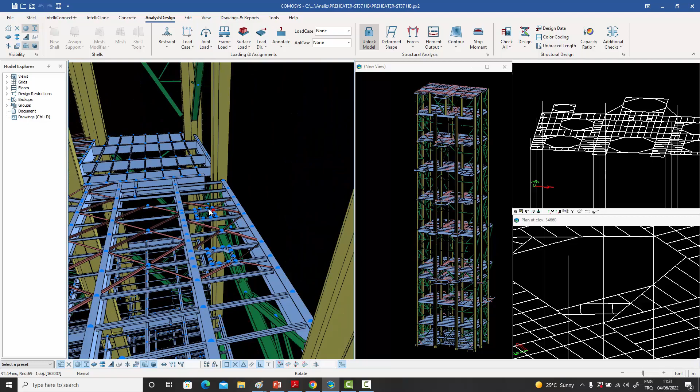Now, let's get back to today. I'll try to keep it around 1 hour, but you know me. By now, I usually end up not keeping such promises. Anyway, let's get to the point and start our webinar.

As you know, the main thrust for today are the analysis and design capabilities of Comosys. Once again, I will try and take you through the various steps involved in this process. I've created a little outline for myself, and I'll try to make it as useful as I can for you. So let's start with the basic element entry. And on the top, as you know, we have these menus, and we'll be talking about the steel and the concrete menus and the analysis and design menus today mostly.

So if we come to the steel menu, you have over here your basic frame element entry commands. And you might be thinking that in typical analysis programs, you have basically one command to enter frame elements. You basically select 2 points and you keep entering your elements. But in Comosys, you've got 1, 2, 3, 4, 5, 6, 7 commands to enter, and there are actually even more beam groups. These are all beam groups, by the way. So there's a column beam group, there's a beam group, this is a horizontal bracing group, there's a vertical bracing group, truss group, purlin groups, and there are other groups as well.

But the reason why we have these over here is because we want to automatically facilitate filtering and some other technologies which we've discussed in the other webinars like IntelliConnect and this and that. Now, coming back to the analysis part over here, to enter elements, all of these commands basically work by selecting 2 points, except for the column, which works by selecting a single point. So if I were to select this column command and click on any point, immediately a column is created. It doesn't require 2 points.

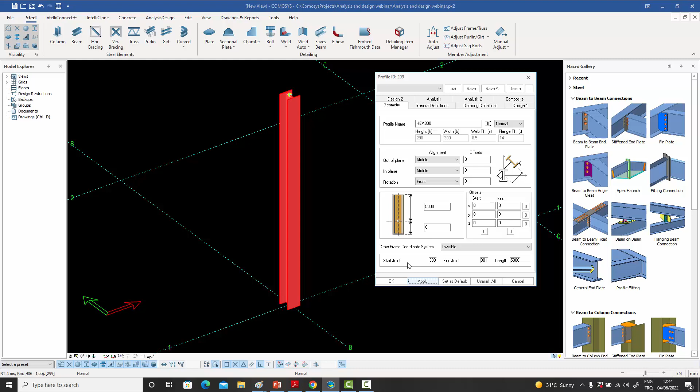So now let me quickly enter a few more columns using the same command which we just talked about, and then go to the beam command. This one takes 2 points rather than a single one like the column, and we can create some beams on the screen.

Now, as you can see on the screen, I have immediately started benefiting from using different commands for each beam group. Not only are the beams of a different color, so visually I can immediately tell which ones are the beams and which ones are the columns, but if I were to make a general selection and press enter, I can even see that beam grouping over here. So if I wanted to select only the beams, I could just double click on the beams and only the beams would then get selected.

Now, if the benefits of that automatic grouping weren't clear in the simple case which I just did, let me show the same thing to you in this large preheater model. Let me just go and select randomly like that. But what if I wanted to select only the horizontal bracings on the floors? I would just press enter, go to my profiles and group by beam group, and say I want the horizontal braces only, and immediately my horizontal braces would have gotten selected.

This could be further refined into just a particular section or beam group, but the point I'm trying to make here is that this automatic grouping by beam groups is extremely beneficial. What you can do is, for example, use the beam command to enter the entire building. You can do that. There's nothing stopping you from doing that.

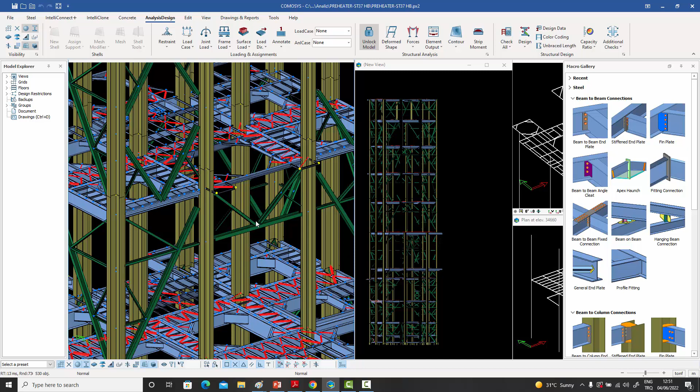But make it a habit in Comosys to always use the different commands which we have over here for the beam groups. The reason why they're grayed out right now is because the model is locked, because this is an analysis model. But the point is that you always use the relevant command: if you're entering a vertical bracing, use the vertical bracing command. If you're entering a horizontal bracing, use that, a truss, a purlin, a girt, depending on your need.

Now, coming back to our small building, let's add a few more beams. So let me just go from here to here, from here to here. As you can see, I've just snapped to the midpoints of these existing beams. What we have over here are the snap options, and if I turn them on, you can see that the midpoint has been turned on, and you've got other things like control points, intersection points, perpendicular to, perpendicular from, parallel, etc. Different options are available. But when we say midpoint, what we mean is actually the midpoint of a segment.

So this was the original beam, and when I was entering this beam, I was snapping to the midpoint of this original beam, and I went from there to there. But now if I go to the beam command again and come over here, there's another midpoint which comes up, and this is now the midpoint of this section of the beam. So midpoint is always the midpoint of the segment.

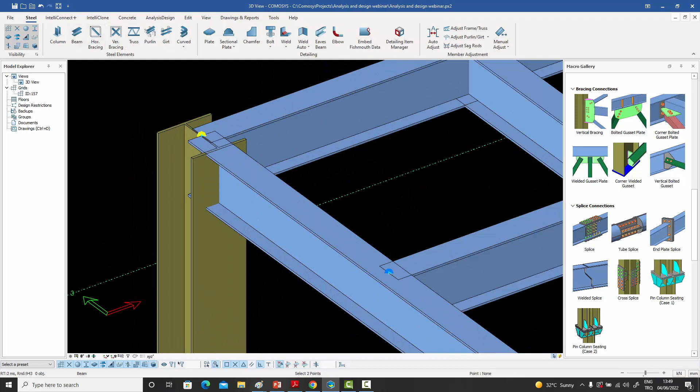Now, one thing which I want to say is that if I zoom in there, for example, and I wanted to enter a plate, you can see that I can snap to any one of these points like that. All those are snappable points. But if I were to enter a beam, it doesn't snap to those points, because it wants me to snap to the finite element endpoints. I could be working from this zoom level, and I could just go in there and say, okay, I want an element from there to there, and accidentally I could have chosen maybe this point.

So by default, Comosys will not allow you to snap to these points. We call them control points of the members, but it will force you to snap to the definition points.

Now, of course, you can override these options, and you can snap anywhere you want if you needed to. But the good thing is that it will not allow you to make mistakes like that unknowingly.

Now, since we're talking about finite elements today and analysis and design, we have to talk about nodes, or joints as we call them in Comosys. Now, in Comosys, you don't create nodes separately and then connect elements to them. As you create your elements, your nodes are being created automatically.

So if I were to zoom in there, you see this yellow dot over there, this one, which you can select. That's a finite element node. And you have the visibility and selectability of that over here. So I can turn them off, I can turn them back on.

But the moment you create any element, so let me create a column, for example, over here. Immediately, the nodes at the two ends are also created with it. So there's one over there, and if I were to turn it around, there's one over there as well. Now, the thing about these nodes is that they're of two types: what we call end nodes, and what we call intermediate nodes.

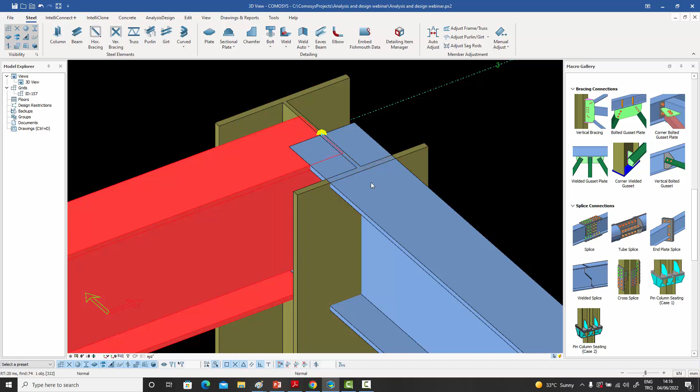If the node is an end node, it will be yellow. So this one over here, for example, was created when we created the column. But then when we entered the beams, the beams did not create extra nodes over there. So there aren't three nodes over there. Only when the first column was entered was a node created. When the beam was entered, the program noticed that the node already exists at that point, so I don't need to create a new one. So I just use the old one, and the same for this one.

So if I were to double click on this node, you will see that it says it has a number of connected frames to be 3. If I were to double click on the column I just created over there, you will see that the connectivity will be just 1. Or if I were to, for example, create a beam from there to there and zoom in again, and now double click on this one, now it's turned into 2. So the connectivity keeps changing as you keep entering new elements.

Now, I was mentioning that there are two types of nodes. One is the yellow one, which we call the end nodes. And what we mean by that is that if a node is yellow, the connectivity is 3, which means 3 elements are framing into that node. But the fact that it's yellow is telling me that it is the end of all the elements framing into it. So it's the column end over there. The beam ends at the same point, and the other beam ends or starts at the same point, basically.

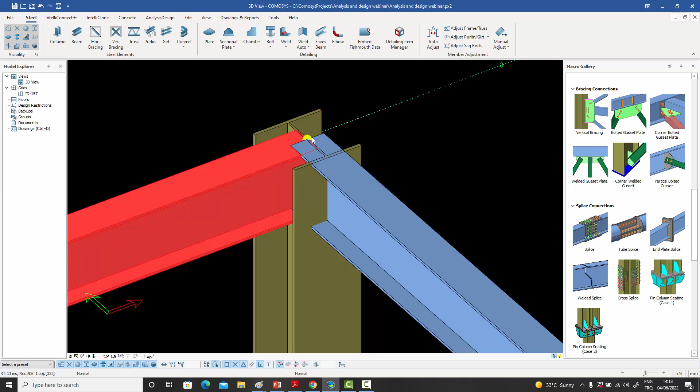But these nodes can also be blue. So, for example, the same node over here is blue, and this one has a connectivity of 2, which means that there are 2 elements: this continuous one, and this beam framing into it. Now, the fact that it is blue is telling me that this is not an end node, but it is an intermediate node. And what that means is that from the connectivity count, whatever 2 or 3 or 4, one member is continuous and the others are ending at that point. So in this case, the one member which is continuous is this beam.

So if I had another beam, for example, from here to here, now if I double clicked on that, the connectivity would be 3. But still, this one would be the one continuous one, and the other 2 would have to be end points. So if one of the elements is continuous, the node will turn blue. But if all are ending or starting at that point, then the node will be yellow.

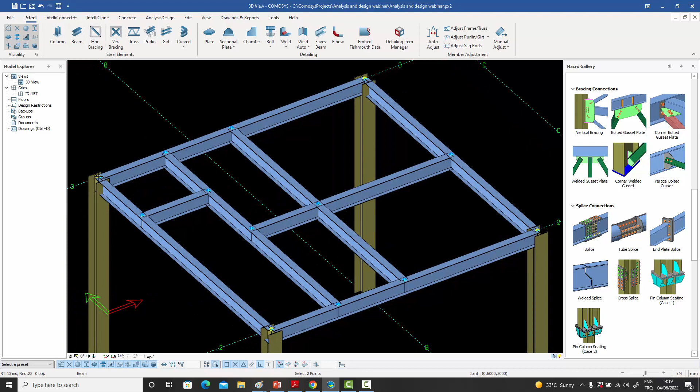Now, what you're not allowed to do is something like this. Let me find an example over here. Maybe I can do something like this. I can create a beam from here to here. Now, this one actually is going through this point over here, but there's another one going through this point as well. So you can't have 2 elements which are continuous at the same point. If you have that situation, you have to find another solution. You have to break that element at that point and re-enter it from the other side.

Now, that might seem obvious. It makes sense that you shouldn't have two continuous elements going through the same point - obviously there'll be a huge clash. But in steel detailing, you can have situations like this.

For example, if I were to go to the midpoint from there to there, and instead of putting that behind, if I entered it like that, this could be a valid real situation in which this beam is sitting on top of these beams, and in this case, one beam is going over.

So at this point, there is continuity in both elements. If I go to my finite element model, which I can do by pressing Alt D a couple of times, I can see the line mode. You can see that this line is continuous as well as this line is continuous, but no node is formed there because right now they're oblivious to the existence of each other - only one element can be continuous.

If you have a situation like this, what you need to do is slightly raise this and give it an offset, then connect it so you have these little connection elements between the two, and those connection elements will create the relevant nodes. Right now, if you do the analysis, this one and this one will not have contact at this point.

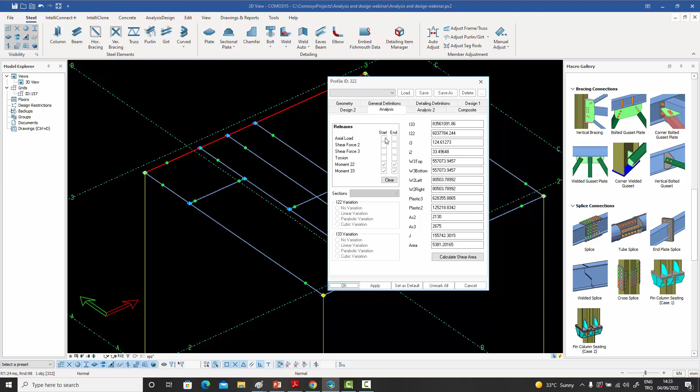There we see that the start has moment M22 and M33 releases, and the end has M22 and M33 releases. But even if it had some other release, as long as there was one release, you would see this green dot. There's a toggle especially created in Comosys, because in steel it's extremely common to have these M22 and M33 releases at the ends - so we have a toggle called Control R to remove those releases. This is very commonly used in steel.

Now, it's good practice to remember this blue and yellow color coding - the blue ones are intermediate ones and the yellow ones are end ones. Because if I make a mistake in snapping, that can remind me of my mistake or correct me when I make it. So let's say I was entering a beam from here and wanted to snap over here, but I'm going to make the mistake deliberately.

Instead of snapping to that point, if I just press enter and say dx1, which is 1 millimeter away in the x direction, and create a beam - now it seems as if everything is okay from this distance. But immediately, the presence of this yellow node will tell me something is wrong, because this one should be continuous. Had I properly connected to this one, it should have turned blue. But since I snapped about 1 millimeter away, it's actually yellow right now.

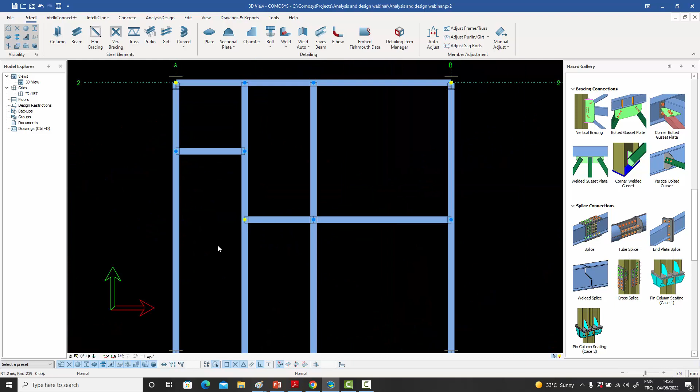If I go into the plan view and turn on my finite element mode and zoom in, I will see that I'm not actually touching that element. Now, one thing worth mentioning is that if you were entering a concrete building and using this menu, these are the commands typically used to enter the main parts of the building, with some more on the side. But only the beam and column commands will actually create a finite element model.

For example, if I were to create a slab over here right now, this will not convert into a finite element model. This does not mean that this is a shell element which will get converted during the analysis stage. Or if I were to create a wall between these two columns, this does not mean that this is a

shear wall. Both these elements are merely for detailing purposes. You can do anything. You can create flares in them. You can modify their geometries any way you want. The primary purpose is for detailing.

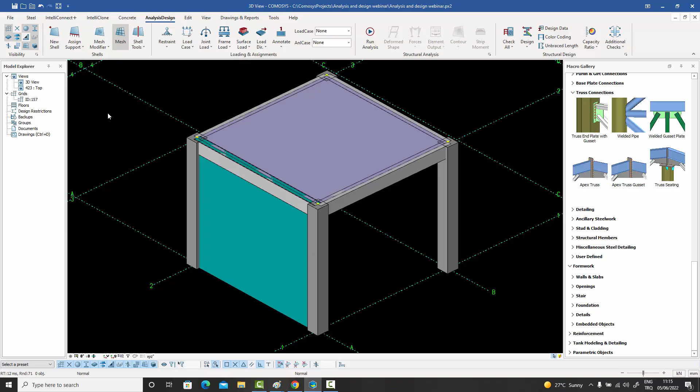If you did actually want to convert them into a finite element model, we will talk about that. There's a different command for that, which we call supershells, and they're very nice tools where you can convert any shell or any slab or any wall into a supershell. But that's a separate thing which you would need to do. At this point, what I would like to mention is that merely seeing a slab or a wall over there should not tell you that this will become part of the finite element model.

Now, a few quick words about creating load cases and load combinations in Comosys. So if you go to the analysis and design menu, you have this menu item over here, or this toolbar. And if you open that, you see there are several options in which you can create and edit

load cases and load combinations from here. You can create and edit analysis cases. You can create spectrum functions. You can edit time functions and ground motions. You can have an automatic load combo generator, which is very useful. And you can basically copy your load cases and combinations between models as well.

So if I quickly go to the create and edit load cases and load combinations, I have several ones already created over there. And if I click on any one, you see that it has a name. This is a load case. You can give it a name. You can give it a type, which is a load case.

Load cases can have types, and the types can be dead, live, wind, snow, earthquake, equipment, crane, construction loads, roof live. There are several cases which are typically used, and you can even add some customized ones if you want at the end. So every load case you will create will have a load case type.

So let's go to, for example, a wind load case over here. And so these wind load cases will have the type of wind load. Now there are certain parameters over here called state indices and sub-state indices.

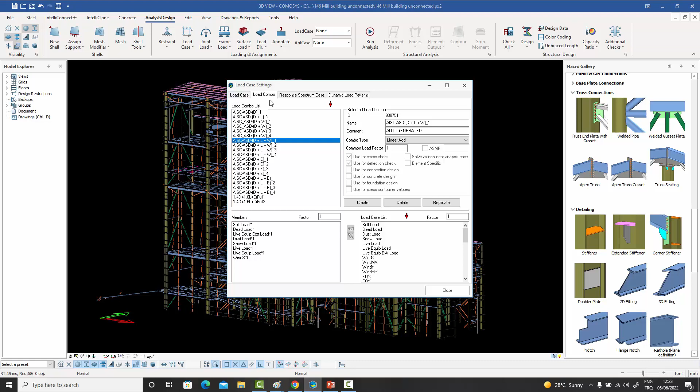So here, for instance, is a case with a crane running around these three bays, and it's got three wheels on which we have the loads. On one side we have the minimum loads, and on the other side the maximum loads. Automatically, the program will create all the load cases for each position of the crane. If you see, the state sub-indices are changing, and this has not been entered manually. This is for the load cases, by the way, and even these can be generated automatically for moving loads like cranes. There are probably about 550 positions, very small increments which the crane can take.

It will create all the load cases and all the load combinations for you. Then you can simply run through them and see how the load is moving on the screen, with the moment diagrams of the crane girder also changing according to the position of the loads. You can use this feature very conveniently for creating multiples of load cases and load combinations in Comosys.

If we keep moving, for example, we could see that the maximum loads would switch to the other side and the minimum loads to this side, creating the actions on the other side of the hall. Obviously, the building itself is getting the loads from the crane transferred to the columns and then to the foundations as well.

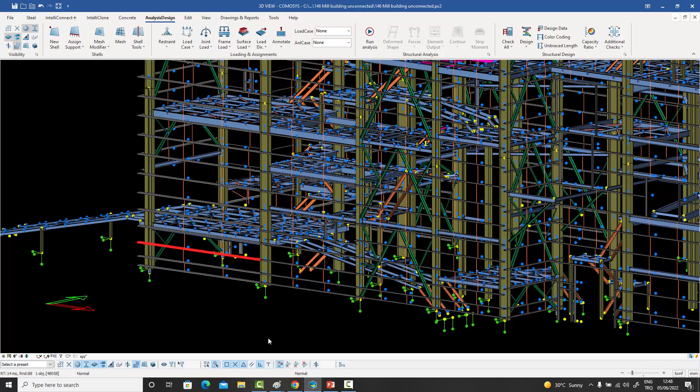Now, if you put the higher load on the girts, the entire building design will be affected, and you don't want that. So what typically engineers will do is create two copies of the model: in one copy there's the lower normal load applied on the building, and in the other copy there's the higher load, but this time they only take the design for the girts. Now in Comosys, what we have is an option called element specific load combinations.

So when you create your load combinations, you can add others. The normal load combinations have a wind factor of 1, but I've created an extra one in which the wind loads have been amplified by 40%. For this particular load combo, I'm going to open the flag called element specific. If you remember the name, it's dead plus live plus 1.4 wind, and I'm calling this one element specific.

So when I do that, this combination will not be used for the design of the building. Where will it be used? If I go and select any girt or multiple girts, double click them, and go to my Design 2 tab, I'll start seeing those element specific combos which I created. Now I can say I want to use this element specific combo for the design of this member.

So now this combo will be used only for the design of this individual girt and not for the design of the building. This will save you from having multiple copies of the same model again and again and then going through them for your design reports and so on.

Now, once we are done with defining the load cases and the load combinations, we would naturally like to proceed to the stage at which we define the loads on the building. There are many ways to define loads on buildings, and some of them you can see on the screen right now. You can assign joint loads, frame loads, and inside the frame loads you have several options for uniform loading, concentrated loading, trapezoidal loading, and temperature loading, and you can select the load cases, etc.

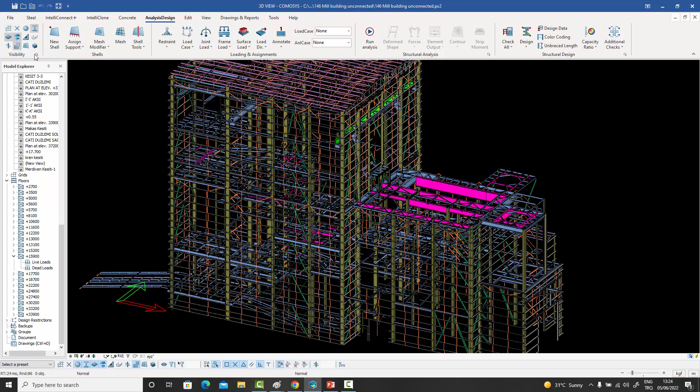As long as there's a plane available, you can use these load transfer polygons to transfer loads on that plane. So what do these load transfer polygons look like on the screen? Let me turn on their visibility from this section over here where you can turn on the visibilities of all the objects in Comosys. And over here on the right hand side, you have floor polygons and you have your visibility and your selectability options. Every object in Comosys has visibility as well as selectability.

So I turn on the visibility and the selectability of the floor polygons. And when I do that, these orange polygons appear on the screen. And these are what we call the load transfer polygons. They can be double clicked. They have their own property editor, which we will talk about.

They have properties according to which the load can be transferred in both directions or in one direction. According to your need, you can, for example, double click on that and change the load distribution to two-way rather than one-way, or you can bring it back to one-way, or you can keep it automatic depending on your needs. But this is what the load transfer polygons look like. And now I will talk about how you actually go about creating them.

So here I am on this floor. The level of this floor is 15,900. And I want to create those orange polygons you just saw on this floor. So all I do is I go to this floor menu on the left hand side, and I create a floor called 15,900. The name can be anything actually, but I'm just giving it the same name as the view so that I can recall it easily. And it appears over here in the list of the already existing floors.

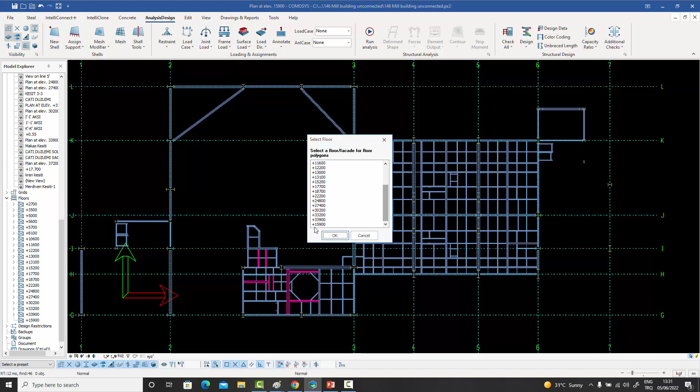And now all I need to do is I go to my frame load command. I can do it from here, or I can just right click from here as well. They both lead to the same place. But if I go from here and I say, okay, the relative level from this level will be 0. So this is at 15,900. I don't want to give it any offset, so 0 is okay. And then it asks me for which floor from the ones created on the left hand side. And if I go all the way down, I've just created this new floor, 15,900. I say okay, and the moment I do that, these orange polygons are created.

It basically goes and finds all the possible combinations where loads could be transferred in this building. So let me turn on the beams like that so you can see it more easily. It finds every possible area where you could have a load transfer, and for that possible area, depending on how the releases of the elements are, it also suggests a load transfer direction, which you can then modify later. You can convert all of them to two-way or all of them to one-way. You can change which direction you want to apply the loads.

But the whole point is that without you having to even select any points, it will create these polygons for you. And then what you can do is you can actually delete some of these polygons. And you can say, okay, I don't want any loading over here. I don't want any loading over here. This is a hole, I know that, in the floor. So you can actually go in and modify this list according to whatever your architectural requirements are.

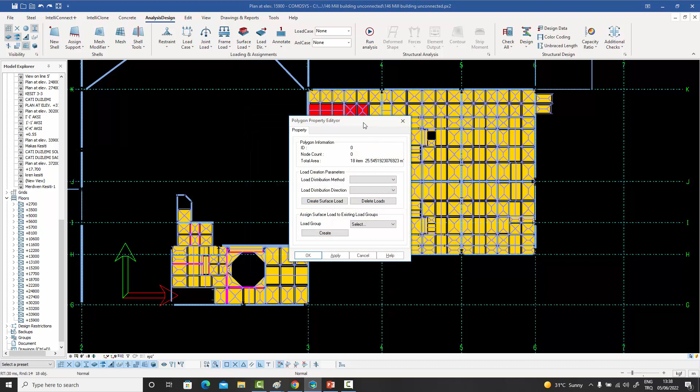Once you have removed the floor polygons which have covered areas which are supposed to be holes in the floor, for instance, you can go ahead and modify the loading transfer directions. So, for example, if I wanted to change all these into two-way distributions, I could just select the floors by the on-the-fly filtering, and then go in there and say I want these to be two-way as well, and those would be converted into two-way. You can select the whole floor and do that. Now, once you're happy with that as well, the time comes to actually apply the loads through these floor polygons.

Now, to do that, all you need to do is just go to the floor polygon, which we have created at the 15,900 level, right click and say, I want to create a surface load using these polygons. And you select that option, and this little dialog box appears. You can select a load case. So let's select the live load case, for example.

And the direction can be global X, Y, Z directions, or you can say perpendicular to polygon. So like I said, you can do wind loads on roofs or any inclined surface. So in this case, I'm going to leave it at global Z, and I'm going to give it a name. I'm going to say live load, and then I'm going to give it a value according to these units. So let's give it a value of -5 kilonewtons per square meter for these floor polygons, and say OK.

And when it says, do you want to create the surface loads? Yes. And the moment I do that, if I open this up, this little live load has been created on that floor. Now, if I were to then rotate this around and look at it like that, and turn on my live loads from over here, the reason why they didn't show up is because the visibility of the loads is off. So if I turn on the visibility as well, you will see that all the live loads have been created from those floor polygons.

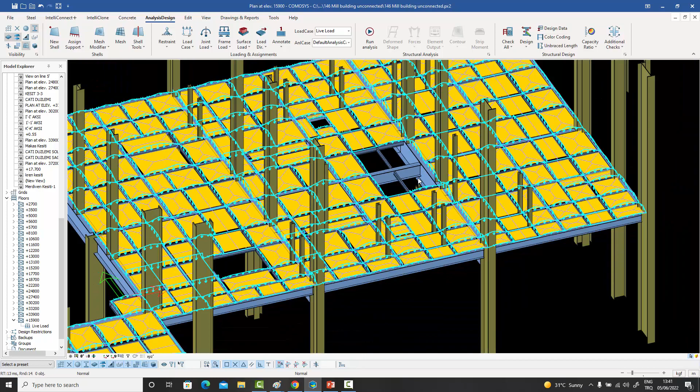So let's say somebody tells me that even this part doesn't have a flooring on top of it. When I do that, you see that the loads are being modified as we delete those polygons. So this is a very easy way to create your floor loads.

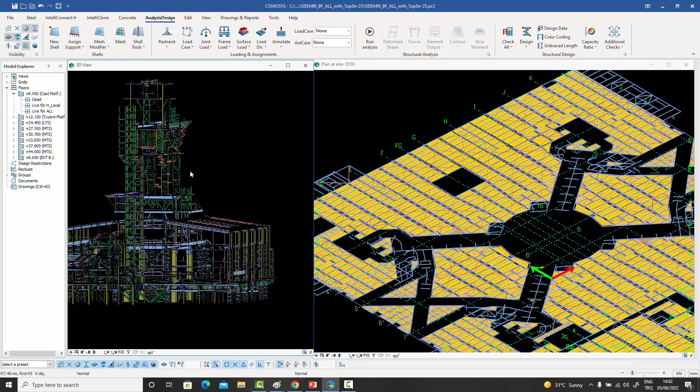Now, if you were doing an earthquake analysis, say based on the equivalent static load method, you would find the equivalent static loads at each floor level and apply them as horizontal loads on, say, the columns directly at certain node points, and that will give you the overall impact of the equivalent static loads on the foundations and on the braces, etc. But we know that in reality, the earthquake loads actually stem from the accelerations of the mass inside the floors. So it's not correct to just assign them to the columns directly.

Just like it's incorrect to assign wind loads directly to the column, they're actually coming through the girts or the purlins. Similarly, the earthquake loads are also coming through the mass which is available inside the floor, and through the live load participation, which is once again present inside the floor. So another thing which you can do with these polygons is you can ask it to create another surface load, but this time you can choose a load case, of course.

But instead of choosing the global Z direction, for example, let me choose the global X direction and call it the earthquake X load. Let's say my equivalent static load on this level is 10 tons, and the area of this whole thing is, let's say, 100 square meters. So that's like 0.1 tons per square meter. So I can actually go in there and say something like 0.1 kilonewtons per meter square, for example. This is my earthquake load in the X direction using these polygons.

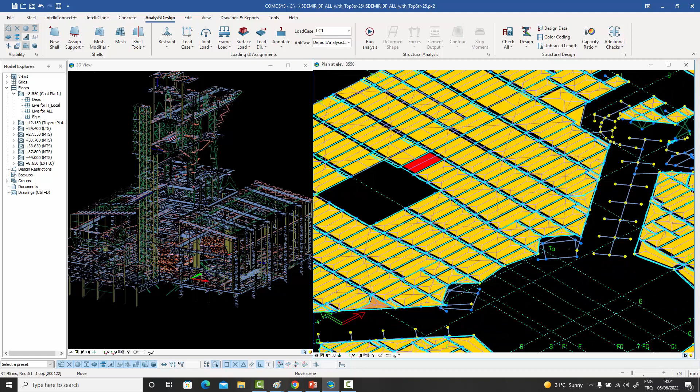If I do that, it asks me, do you want to create the load? If you see on the screen, it has actually created horizontal loads using these polygons once again, wherever they are perpendicular to the beams. So let me turn the beams on. Whenever they're perpendicular to the beams, they have been created as lateral loads. And for this beam, for example, over here, it's being applied as an axial load directly inside the beam.

So it'll end up as the same 10 tons which we wanted to give to the columns, and the columns will receive the total of 10 tons, and that will be transferred to the vertical braces and from there to the foundations. But the actual small moments which in real life do occur on these beams as M22 moments, for example, and all the loads in these horizontal bracings, etc., will actually be much more realistic if you apply the loads in this fashion.

Now, as I had said, these floor polygons are not really restricted to floors. The name is floor polygons, but they can be used on any plane in space. The plane can be an inclined plane, it can have whatever orientation. So over here, I have created a roof plane. This plane, as you can see on the left-hand side, is an inclined plane. And on this roof plane, I've created a view. And using this view, I'm going to just ask the program to create the polygons for me.

And I'm going to give it a level of 0 because the relative distance from that view is 0. I'm just going to say OK. And immediately you see these floor polygons are now created on the roof plane. And I have filtered out the sag rods and the horizontal bracings from this view because I don't want the polygons to be broken at those levels or at the roof bracing levels. And because I've done that, now these floor polygons conveniently are located between the purlins, and they will distribute the load left and right of the purlin.

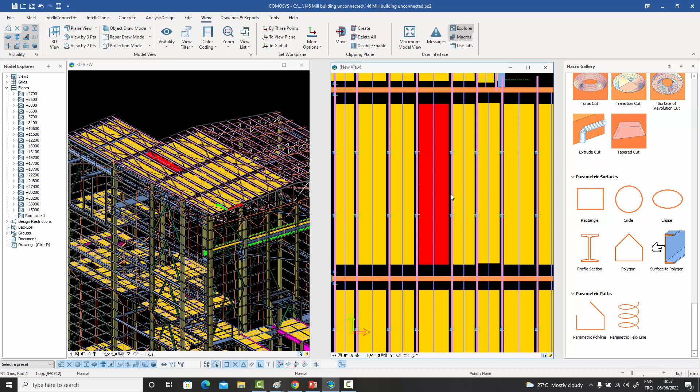And now that I have the polygons, I can once again conveniently take them, right click and say create surface loads. I can say, for example, I want to create a snow load. I'll say perpendicular to polygon this time because the polygons are inclined, and I want to create a load which is, let's say, the roof wind load. I shouldn't say snow load, snow load is vertical, but let's just put it in snow load for the moment. Let's give it a name, roof snow, assuming that it's actually in the direction of the wind. I'm going to give it a value of 1 kilonewton per meter squared. And the important thing is it's perpendicular to the polygons, and that's what I wanted to show.

So when I say OK and it's created, the snow load option is open. And as you can see, the roof loads have been created perpendicular to the polygons, over there. And you can also notice the last purlin got lesser load because the tributary area was less from the left, and the other ones got the same load. So these floor polygons are extremely convenient to create all sorts of load. You can use them to create wind loads, snow loads, live loads, earthquake loads in the X and Y directions. Basically anything which resides on a plane, you can use these polygons to create.

Now, without wasting too much of your time, I want to move on. So I'll just show you that, obviously, you can assign joint loads. You can select any joint and give it a joint load in the form of forces or moments. You can assign joint displacements as well. We'll talk about them later. You can assign frame loads. So if you were to select any particular frame and go into the frame load command, you can assign uniform loads or concentrated loads or trapezoidal loads or temperature loads, and for each one, you will have different parameters to enter in the dialog box.

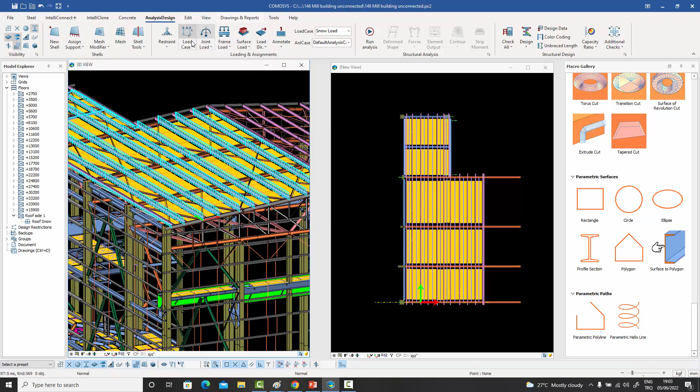And you also have these other ones which we talked about. I won't be talking about the area loads which are applicable on shells, or area loads or line loads or point loads on shells. We'll get to them when we talk about shells. But all kinds of manual loading is possible, and you just need to know that at the moment. So I just want to move on to the next topic.

Now let's move on to joints and what we can do with them. So we had discussed these yellow and blue joints before. The yellow ones were end nodes and the blue ones were intermediate nodes. What you can do with them is you can select any one of them, double click on it, and it will give you this option of adding a restraint to that particular joint. And you can obviously have U1, U2, U3, R1, R2, R3. Those are the restraints you can have.

If you press this one, then the whole thing gets fixed. Press this one, it's a hinge. This can be a roller. You can modify them manually as well. But what else can you do with joints? You can select any joint and you go over here and you can assign a joint mass to that joint.

And the joint mass, you can give it a name. You can give it translational masses in the 1, 2, and 3 directions. And you can give it a mass moment of inertia about the node in the local axis 1, 2, 3. And you can define the units over here. That's one thing you can do with joints.

Another thing you can do is you can assign joint springs. So if you want to model the soil and you don't want to make it fixed, but you want to model it like a spring, then you can assign a joint spring. Similarly, you can assign joint restraint, which is what we just talked about. And you can also assign multi-joint constraints.

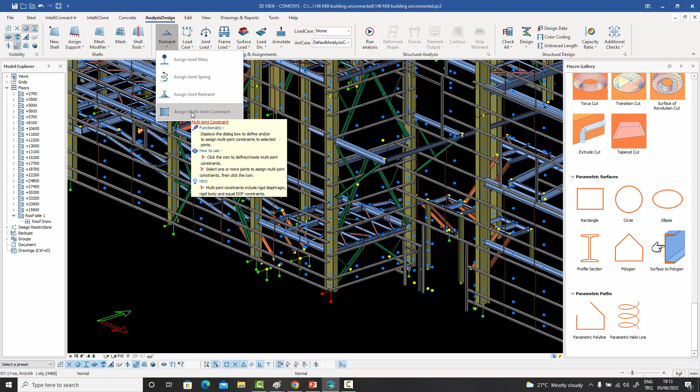Now, what we mean by that is, let's go to the site, for example, if I were to select an entire floor and select the joints on that floor, and if I went into assign multi-joint constraints, I have the option of making it a rigid diaphragm, or giving all the selected joints an equal constraint, or giving the selected joints a rigid body constraint.

In the case of a diaphragm, you can give that diaphragm a name. You can define the constraining axis, which is usually Z for the horizontal floors, but you can even make it along any plane. By selecting the auto option, whatever plane is defined by those joints, it will be taken to be perpendicular to that plane. With the equal constraint, you have the option of defining which particular degrees of freedom will be equated as far as those joints are concerned.

You can give it a name once again. You can save them away. And for the rigid body one, you only need to give a name. There's nothing you need to define because the selected joints will behave like a rigid body. There's a difference obviously between a rigid body constraint and a rigid diaphragm. The rigid diaphragm doesn't behave like a rigid body. It behaves like a rigid body only inside the plane, not outside the plane.

Now, since we talked about assigning masses to joints, let me just remind you that you don't always have to do that. When we go back to the load cases, you can specify any particular loads in a load case to be converted to mass during the analysis stage if you're doing a dynamic analysis. And you can say that any load which I enter under this load case, convert it to mass with a mass conversion ratio of whatever this number will be. Codes will usually specify these numbers, and 0.3 is a very typical number for live loads.

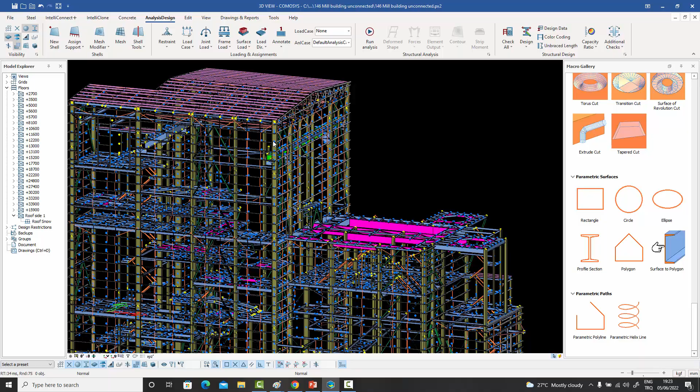Now we've talked about entering the basic frames and how to give the joints restraints and constraints, and then how to create load cases and load combinations and all that. And it seems that we are now ready to run the model. But there's one thing we haven't talked about, and we need to talk about that first, and that is shells.

Now we know that no analysis model is really complete without shells. Maybe not that much in steel, but especially with concrete structures, we have to model a lot of times our shear walls and our slabs, etc., using shells. And so I need to tell you about the various features we have in Comosys regarding shells. Now, the first thing which I need to tell you is that in Comosys, you don't enter shells directly, but what you do enter is something we call supershells.

So I'm going to enter a supershell. And what you do is you simply go around the entire floor, for example. So let's let this be the entire floor. And the supershell appears in front of you. Now, if you double click on that, you open the dialog box of the supershell. And here you can change how it will be drawn. So I like the contoured solid.

There's the thickness of the supershell, 200 millimeters at the moment. There is a uniform density, because the supershell is going to be meshed for the analysis. So right now it's about 1 meter. And there's a default material which we have, and we can change that to any other material. For example, I can convert it into, say, a C35 concrete, 200 millimeter thickness, and say apply. Okay, and now we have entered the properties of this supershell.

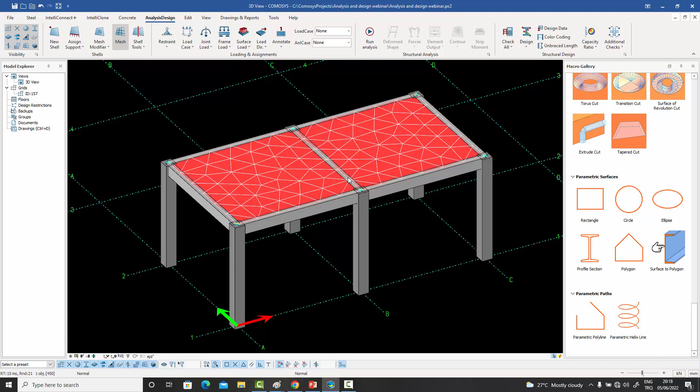One thing I want to say at this point is that these beams you see over here, because the supershell will be meshed like this at these points, for the finite stiffness matrix assembly, this beam will also be broken into little parts in the background. You won't notice that, but in the background, while it's assembling the stiffness matrix, in order to have a continuity in the displacements, these beams, wherever they're touching the supershells, they will be broken down into their own subparts.

Now, these supershells have some really amazing features which really make your life easy when it comes to the analysis of shells. And one of them is its ability to sniff out or locate whenever there's a frame element touching it. So I already talked about how these will be meshed because the supershell is in contact with it. But this is not only at the edges.

If I were to, for example, enter a beam like that and say DX 1000 using the static entry method, and at the other edge, if I were to say DX minus 1000 and basically enter the inclined beam like that, and now if I ask the program to give me a preview of the mesh, you will see that now the mesh has changed and it's going along this line of the beam. And not only will this beam be broken down into subparts, but the mesh created by the supershell is also in perfect union, in perfect harmony with that particular frame element.

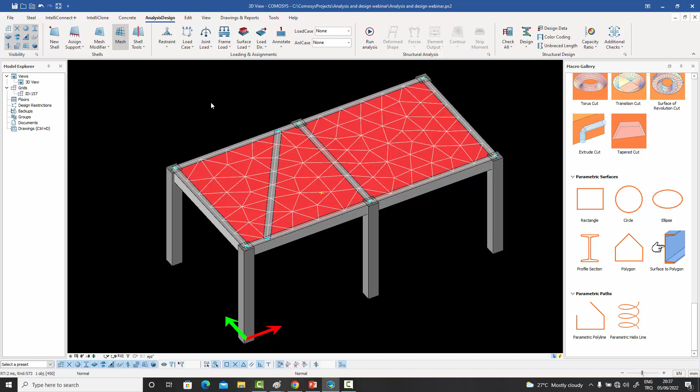But that's not all. Let's say we were not happy with this density of 1000 which we see on the screen, and we wanted a higher density. We could just make the density higher, call it 300. When we do that and mesh again, we can see the density has changed, and once again it fits the beam along that line as well.

But this is not what we want to do. What we want is to keep that density of 1000, so let's keep it back to the normal number. But we know that for some reason there's a stress concentration in this area, and we want a higher density, but only around this point and not on the entire slab.

So what we do is go to our mesh modifiers and say we want an internal point at this point. That's the first thing we do. Next we want an internal mesh density at that point, and we put that element there as well. Then we select them and press enter. For the density point, we can say we want a density of 250 at that point, and this number should be about 3 times that number, so let's call it 750. This is the radius around which it will spread out.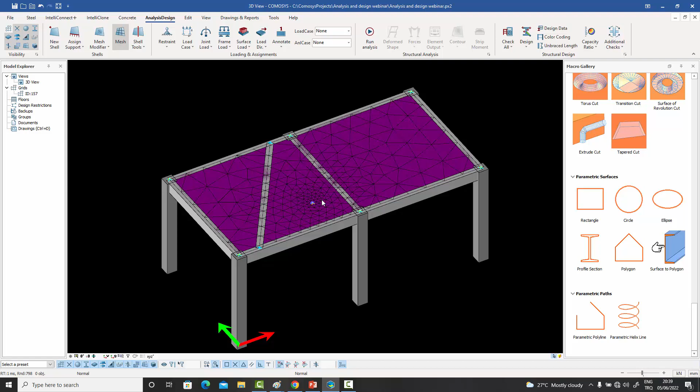Once I do that and press preview mesh again, you will see that the density has been reduced around that point only, and it slowly grows back into the normal number of 1000 which we had elsewhere in the supershell.

But it's not just internal points which we can use to modify the density of the broader region. We can also have internal lines. So I could go to the mesh modifiers and say I want a mesh internal line between this point and this point. Then I can also change the density along that line, so I once again select the same 2 points.

Once I do that, I can select those objects, go to my density line object, double click on that, and give it a density of, say, 350 millimeters, and give this one a higher number because this is a line now, not a point.

Once we do that and preview the mesh again, we see that not only do we have this increasing mesh size around the point which meets up with the 1000 general density, but we also have the same phenomenon going on around this line, and it's meeting up with the broader density of the slab as it goes out into the outer regions.

But even that is not all. Slabs and walls can have holes in them, right? What if this supershell had a hole in it? How would the meshing algorithm behave according to that?

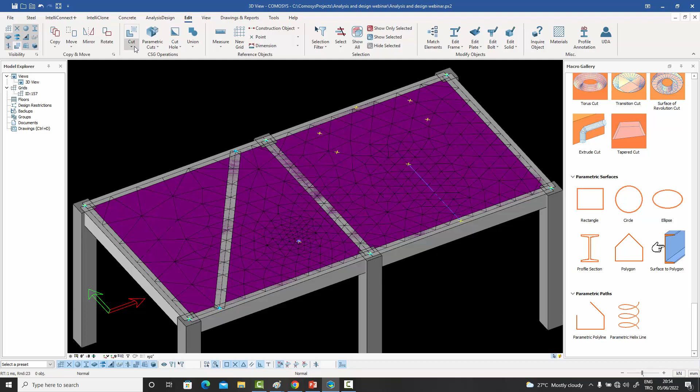So you can go to your cut commands. What you can do is go to your polygon cut, select this supershell, and say I want to cut this, make a rectangular opening in there. You just select the points, and the rectangular opening is created. The moment that happens, your mesh basically regenerates.

If we were to select that cut and move it around, right click and say move linear, give it any number in the Y direction, and say move, you can see the mesh is adapting as the cut is moving, even as it's going through that density line. It's very convenient. Let me move the cut, and you can see even the density is still being applied along that line, and the cut is being made.

Basically all our requirements, which were a hole in this area, increasing line density along this line, but a general density of 1000, all those requirements are being satisfied.

Now we know that the supershells are intelligent. We've seen that, and they can sniff out these elements which are lying in the plane of the supershell and mesh according to their presence. But what if these frame elements were not in the plane but were actually outside the plane, in the direction perpendicular to the plane?

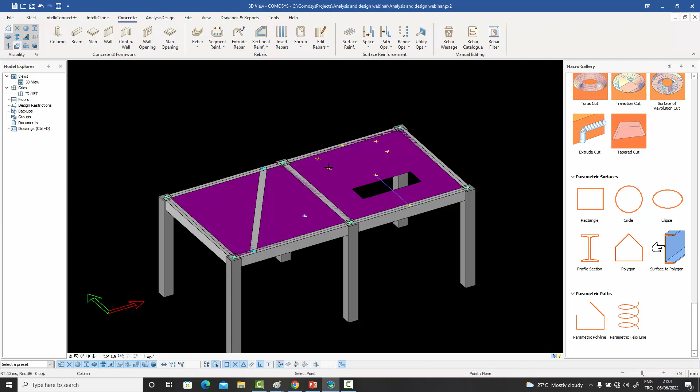So let's say we had a column sitting at this point on that slab and another one sitting at this point. These are not inside that plane, so let's make a beam on top of it as well. Let's make matters even worse, and go to the analysis tab and create a new supershell, like a shear wall, or like a wall. Let's create it like that, double click on it, change the color for convenience, make the settings, turn it into a concrete element, and give it a different density of 350.

Now we have a different, even more complicated situation in which we've got some elements coming up vertical or perpendicular to this existing supershell, and one of them is a supershell itself, and they're also frame elements like you see on the screen. The density of this particular supershell is 350, while the overall density of this one is 1000. So what's going to happen at these points of contact?

Let's go and ask the program to do the preview mesh for us. And when we do that, we see that this one has been meshed with 350. And as it touches this one, because the density is higher, it's being forced to adapt to that one.

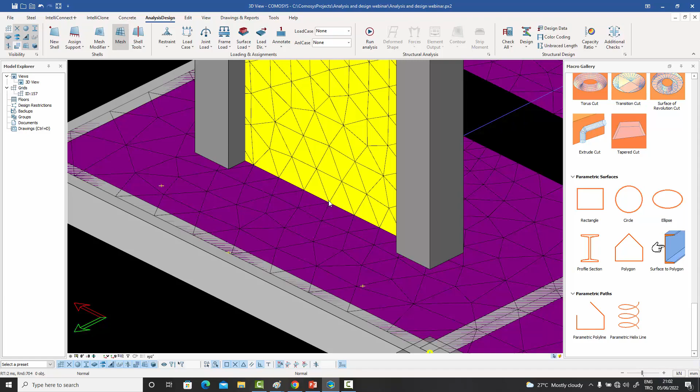And on the back side as well, you see a perfect harmony between the meshes. And if we were to convert this into line mode, you will see that the columns are landing at a point which is an exact node point for the supershells. So what we have is exactly what we would have done by hand, and this would have taken us hours to do.

You can probably already feel the kind of advantages this supershell meshing is going to give you. Those who are thinking about steel might already be thinking how they can use these features to design or analyze steel connections, to a certain extent. And especially for concrete structures, you've already seen the kind of power it can give.

If we wanted to make a shear wall over here, we could just enter a supershell again. Once again, as you know, we don't enter shells, we enter supershells in Comosys, and Comosys does the rest. So we can enter a supershell, change the settings if you want to, whatever.

And then if you wanted this bottom part to be restrained, we could assign the line support, for example, and say from here to here there is a restraint. What that will tell Comosys is, if you double click on that, just like the joint restraints, we can have UX, UY, UZ, RX, RY, RZ, constrained or unconstrained.

You can remove those. But what it will tell Comosys is that when you're doing the analysis, this wall is going to be meshed, obviously. And so some of those joints will come along this line. So whatever joint ends up on this line, that needs to be fixed like this, according to these fixities.

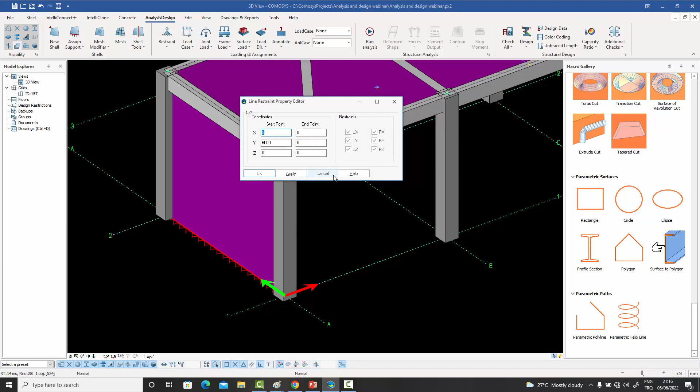Similarly, just like the line support, you could have point supports as well. So instead of having the entire line fixed, you could have just a point over here fixed, and then whatever node would come to that point would be fixed by Comosys.

Now, sometimes slabs don't have a uniform thickness across the floor. So you could have one thickness, and then a slightly bigger thickness in a particular region, for example. So what you do in Comosys is you go to your shell tools and you have a supershell region modifiers. Once you select that, you can select the supershell, right click, and then select the points where you want a different thickness property, or some other stiffness property can also be modified.

And once you do that, if I were to just hide this, for example, what it has done is it has created a hole in the original shell, but it has added another shell exactly at that point. And this particular shell now you can modify with a different thickness if you wish.

If you just double click on that, you can change the thickness from there. You can assign it some soil springs. So maybe only this particular part can have some different soil spring, or some load case related. You can take existing loads from the parent supershell. So a lot of things can be done with these region modifiers, which are very useful.

Now, obviously, you can assign loads to these supershells, and if you go to the surface load menu, you can assign the supershell a surface load, which needs to be a uniform load, basically, along the entire supershell. You can also assign a line load, as you can see over here. You can assign a point load, as you see over here.

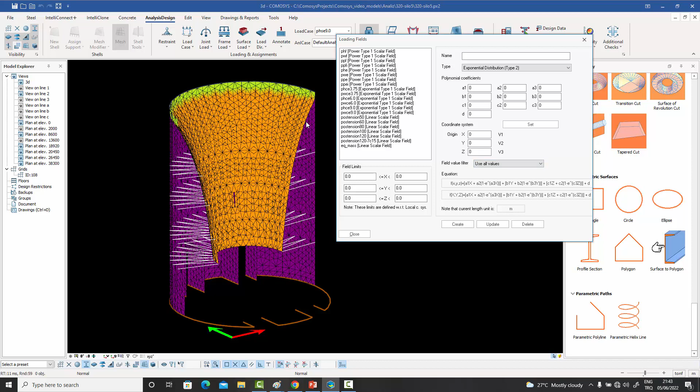So you have 6 different types of fields which you can have. And then you can also tell the program that although this field can have both negative and positive values, I want to only use the positive, where the values are positive or 0, or only where the values are negative and 0. And since it's a vector field, wherever it runs into the coordinates, it runs into the actual supershell.

So this is the supershell at the back, and this orange is the vector field. Wherever it hits, whatever the coordinates of the supershell will be, this vector field will have a value because it's a vector field defined at all xyz coordinates. So whatever the xyz coordinates of your supershell are, the vector field will assign a force at that point according to its own value at that point.

This is extremely powerful, so it can be used in silos for the internal loading of materials, which are usually not linear functions. There are different kinds of functions used. And because you have the polynomial option as well, and the exponential and power function options, you can do a lot with this kind of loading. This is really unique to Comosys, and it will help you solve a lot of your loading problems.

Here I've created this little 5-story concrete building. It's got 5 floors, and I've put one supershell on each floor, basically encompassing the entire floor. Then I've got these shear walls, one on the left and one on the right. The thickness of the shear wall is about 20 centimeters, and the thickness of the slabs is also 20 centimeters, I think that's the unit, yes.

I have loaded it to give a uniform vertical load on each of the supershells in the live load case, about 200 kilograms per meter square or something like that. Then I've given it some wind X loads and some wind Y loads. I haven't gone into detail, I've just put some loads at the top level in the X direction and some loads in the Y direction at the top level, and those are in my wind X and wind Y load cases.

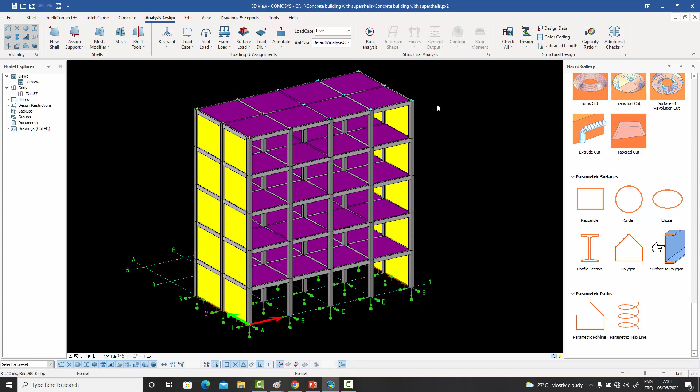Now what I will do is run this analysis in front of you. It will create the mesh at runtime. Like we discussed, we could have had holes, line loads, all sorts of things would have been possible, but I just want to show you the results of how we check the results of the supershells. So let's run the analysis in front of you.

It says the project is going to be saved. Do you want to continue? I say yes. And now it's meshing the entire structure, and it's a fine mesh. So it takes a few seconds, and then it basically finishes the job.

So let's check the deformed shape first. That's what an engineer should do first, just in case there's anything wrong with the model. That'll be the first place which makes that apparent. So if you press that button, we come to this different page, where we have these options to play around with the deformed shape, and we can rotate the view over here like that as well.

And what we see is the live load case. Like I said, we had entered the live load case in which there were vertical loads, wind X and wind Y. So right now we're seeing the live load case, and we can turn it around to see from various angles. If we press this animate button over here and say start the animation, we can see how it's going to deform. And while it's animating, we can also turn it around.

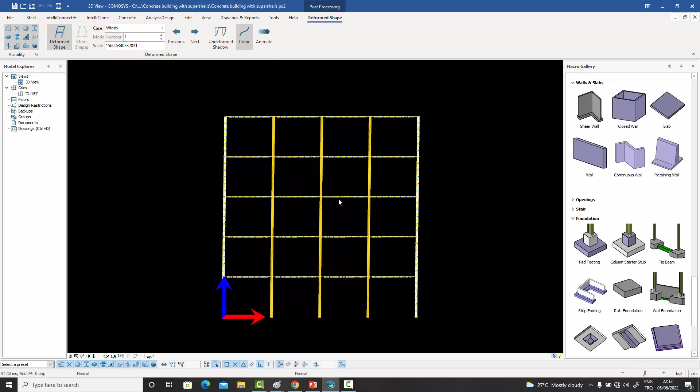One thing I can do is I can change the load case to wind X. And when I do that, I can turn it to the side as well, and I can see how it is deforming. Once again, I can turn it to wind Y, and this time it's the other direction. And like this, I can easily inspect what's happening with the deformed shape.

Now let's get back to the structure itself. And over here, you have this contouring option. And if I press this button from here, this submenu appears. And if I go in there, I can set the settings for how the contours will be plotted. So let me do that.

So over here, I have the option of plotting either forces and moments on the supershells or stresses on the supershells, or we also have soil pressures and surface displacements, surface loads, and even areas of steel. So I'm going to start off with the forces and moments. If you choose the forces and moments, then you have F11, F22, F12. These, as you know, are the shell internal forces. F max, F min, M11, M22. Let's keep it at M11 because we're going to look at the slabs right now.

And over here we can have a customized range for the output as far as the M11 values are concerned. We can choose to create contour lines or draw the mesh, etc. Let's just leave it like that. And after doing the settings, we just press this button over there, and it's going to create the contours of the results of M11.

And on the right hand side, you see this legend, which tells you what are the minimum ranges of the stresses in whatever units you have over here, and what are the maximum you see on the screen. And this is a very easy way to inspect the results.

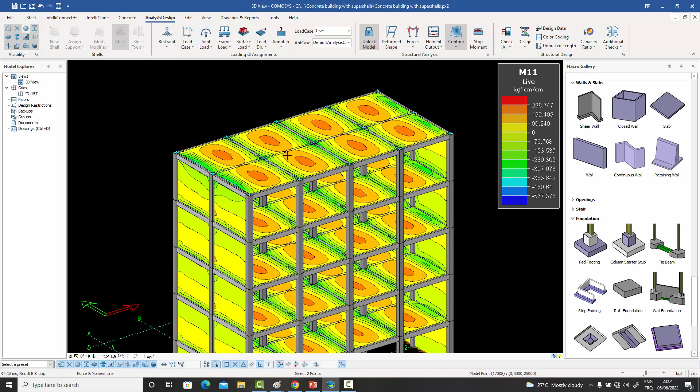Now, coming back to these results for the vertical loads, these M11 results, what we can also do is we can create what we call strip moment lines. So I just select this button, and I select 2 points. I can select any 2 points as long as they make a line. And then I can select that line, press enter, double click on that, and I can say show the diagram. And when I do that, immediately the moment diagram along that line is created.

So if I were to, for example, select this and say show only this one, I can see the moment diagram across that line, and I can place my steel accordingly if reading from the supershells is a bit more difficult. And similarly, I can create this line in the other direction as well.

So I can have this line from this direction, from this point to say this point. And now, once again, I can select that line, press enter, double click on the force moment, tell it to show the diagram. And once that happens, I can now see the diagram in the other direction as well.

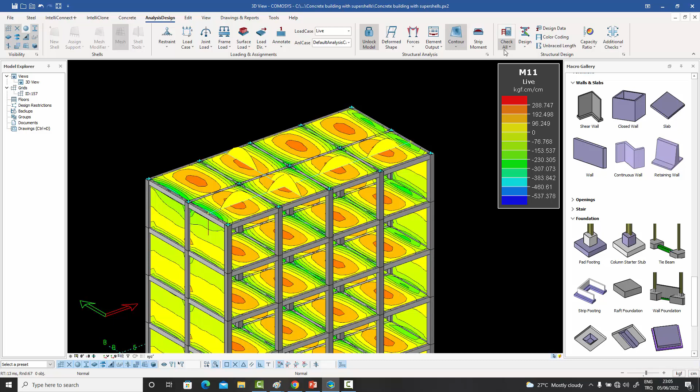So these strip moment lines can be, like I said, they're lines, they can be in any direction. They're particularly useful if you're doing something round, for example, a circular slab, and you want to place the reinforcement in the radial direction, for instance. But the supershells have been created in whatever coordinate systems you needed for creating that circular slab. But you want to see the moments along the radial line. So you just basically use this strip moment to create along the radial direction, and you will get to see something like this to see what the moments are along that line.

Now, as I had mentioned earlier as well, if you go to the settings over here, you have these various options of checking stresses or forces or soil pressures, and you also have this option of checking the area of steel. And if you select that, then you have these options of checking the top surface area in the 1-1 direction, the area of steel required on the bottom surface. Similarly, along the 2-2 direction for the top surface and the bottom surface.

So let's just check for the top surface what our requirements are. So how much area of steel we need for the top surface. And when we do that and we press this button, we see that for the top surface, we basically don't require, so there's 0 over here. This is centimeters squared of area per 100 centimeters. So we basically don't require anything in the middle. We only require the top surface area in this region. And we can check how many centimeters squared are required using the legend over there.

Similarly, if we were to go back in and check for the bottom surface, we will get the opposite result, because then we don't need any bars in this area for the bottom surface, but we basically need it in the middle. And over here also, if we know how much minimum reinforcement we're going to provide anyways for the slab, and we know what that number is, we can put that number over here.

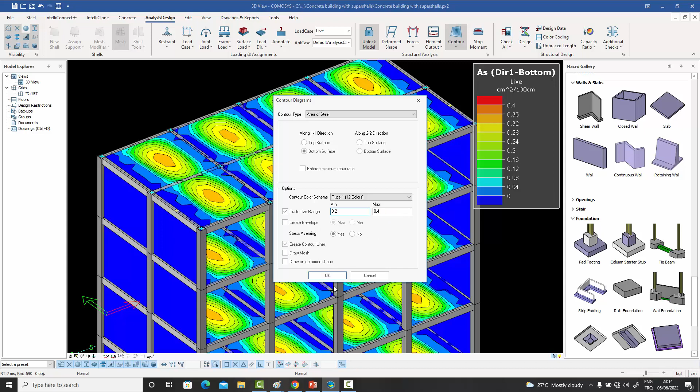And so what it will do is it'll only tell you about the areas where even that minimum is not enough. So if I change the minimum over here in the customized range section, what it will tell us is that your minimum is basically okay everywhere as far as the bottom reinforcement is concerned, but these areas require reinforcement. This is the range from the minimum to the maximum. The blue areas basically won't require any because you already have the minimum over there. So it's a nice way of checking wherever you want to put some extra reinforcement.

And if it is not concrete slabs which you're designing and you're interested in steel plates and their stresses, then in that case you will obviously go to the stresses section and probably be more interested in the von Mises stresses, and you can easily then tell which areas of your structure are being pushed to the limits, and then you can increase the thicknesses of the plates in those areas.

Now there's one very handy little feature which I just want to talk about for a few seconds and then move on. If you go to your Supershell tools menu, you have the option of splitting supershells and converting plates to supershells. But there's also this option of converting any surface into a supershell. And this is pretty handy, and at times it can really help you quicken your modeling time. So you basically just select this, and then you can select any surface on the screen.

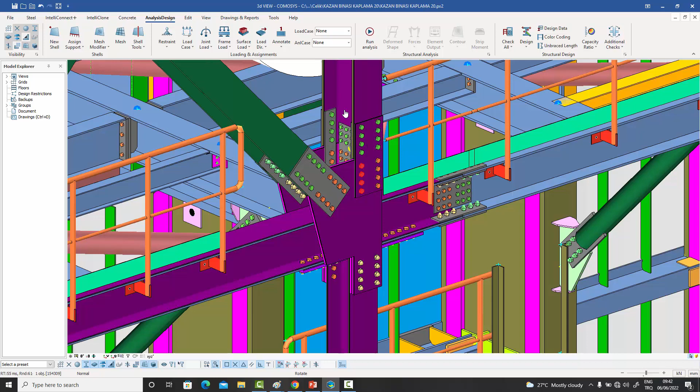So let me just select this I-beam flange and this I-beam web and the back of the flange again, and then this web and this flange and this bottom flange, and for the column as well, this one and this one, and this plate and the plate at the back. I'm just doing random selection right now, and maybe I want to select this plate over here as well, and I right click and I interrupt. And if I go into my visibility settings and I just open my supershells right now, you can see that supershells have been created for that area, and I could have continued clicking.

And then obviously you have to now go in and do the rest of the modeling. But this will, if you wanted to, for example, somehow model this connection, or it could have been some other instance where you could have used the surfaces to create your supershells. Now each of this is a supershell.

You can go in, you can change the density, you can change the thickness, you can use all the features which we talked about for internal lines and internal points, and you can have your points of the bolts, for example. You can have little elements connecting them and stuff like that. But this is just something I wanted to mention, because it is very useful in quickly creating supershell models from something existing which you have on the screen.

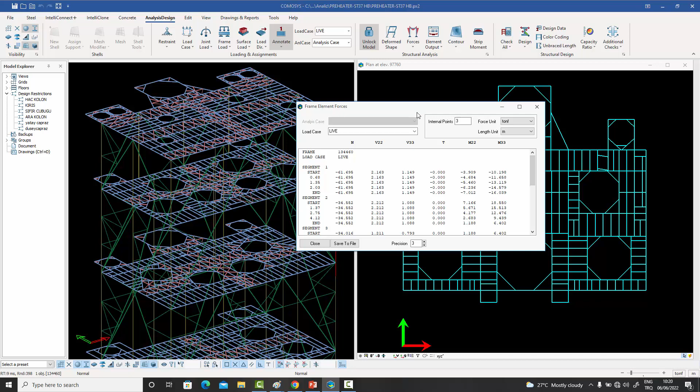Now let's talk about viewing the analysis results on the screen. So we can do that in both tabular as well as graphical form. So if I were to select a column, for example, and go over here and say I want to see the element analysis output tables, we can select any load case which we want from here, and for that column it will tell us about all, because this column is a huge column. It's going from this story all the way 2 stories up, and these stories are pretty tall.

So it'll give it from the start, segment 1, segment 2, segment 3, all the way down till the end of the section. And you can even ask it to increase the number of points for each segment, and you will see all your 6 major results: your axial force, your shears in the 2 directions, your torsional moments, your moments M22 and M33, etc. If you want, while the table is open, you can switch to another element. If you want, you can select multiple elements, and the entire tables for all those elements will be presented to you in tabular form.

What you can also do is to select any element, and then instead of the tabular format, you can do it as an internal force diagram as well. So once again, I've selected the same column and I've chosen the live load case, and I can move my mouse cursor over the column, and I can see the actual values in whatever units I want. And I can see values for the axial force, the torsional moment, the bending moments, etc., and even the deflections, depending on what load case I choose.

If I wanted to see the results for the entire building in one go and not element by element, I could just go to this command over here and say turn on my M33 moments for the entire building. And then I can zoom in and see what their relative values are. If I select a particular element, then the values of that particular element will be shown. If I just don't select anything, then everything will be shown, but that obviously becomes a clutter depending on how complicated your building is. But what you can do is you can go and select any particular element, and then you will see the values of whatever moment diagram or shear force diagram you are printing on the screen.

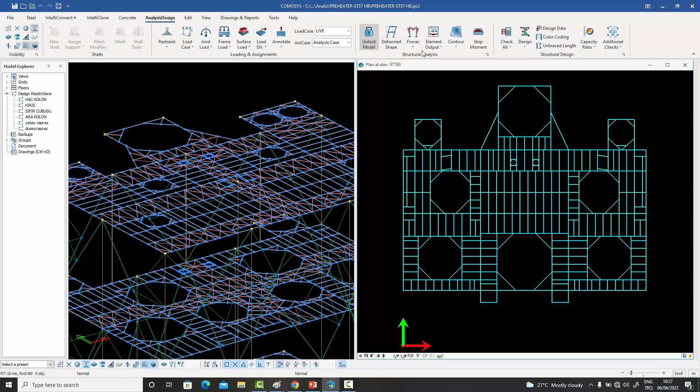Now, let's say we are in this view, which is a plan view, and I wanted to look at the M33 moments, for example, for the elements which are visible in this view. If I press that, I'm not going to see much because the M33 moments are out of this plane. So what I have the option to do over here is to say project to the current view.

Now, if I do that, then my M33 moments are projected to this view, even though they're actually in the other direction. But since I'm working in the plan view, this provides a handy tool for me to see which particular beams are being stressed the most and where the moments are the maximum and stuff like that. So this ability to project to the current view is very useful when you're working in plan or sectional views.

Now I want to move on to the design capabilities of Comosys, and I want to start off with the basic design tab, which is in the dialog box of all frame elements. If you double click on any element, we see this dialog box, and I want to quickly go over the basic parameters which are available over here so that basic understanding is achieved. So the first thing we see over here is check for lateral buckling. And this tells the program whether we want this particular element to be checked for lateral buckling.

We can turn it on or off, depending on whether we want that or not. Now, this is an interesting flag over here, which means provides buckling support. So what this tells the program is whether this chosen element actually becomes a supporting member for other elements. So for example, if I were to choose this particular beam and double click it, and I say that this one does not provide buckling support, then the buckling lengths will be calculated as if this element does not exist. And these ones exist, but this one does not for the beam, for example.

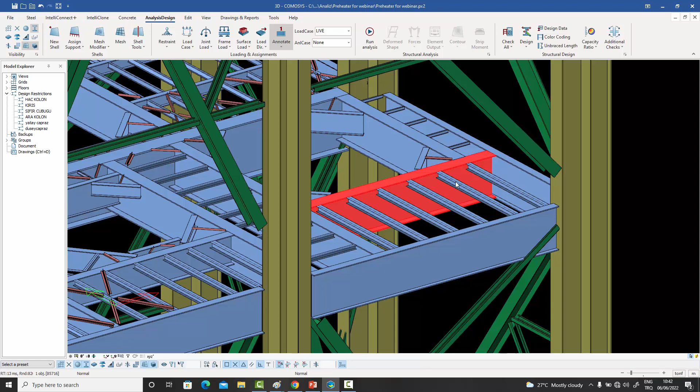Now, this obviously depends on, maybe this is not a good example, but if we had, for example, girts over here or roof purlins, you might or might not want to include them as providers of buckling support for the column. In industrial buildings, it's very common for the girts to be removed temporarily for maintenance purposes and this and that. So although they do exist, you might not want to consider them for your buckling support.

Now, continuing with the tab, there's this thing called forced. What that tells the program is that you don't want this element to be designed by Comosys. You want to force this particular section. You don't want any optimization. Maybe there's an architectural requirement, maybe there's some other requirement, and you don't want to allow the automatic algorithms which work for design to act on this element.

You can tell whether it's a rolled section or not, and that obviously can change the design. This is important. So for example, in columns, the columns might be braced in this direction, the main direction, or in the web direction, or they might not. And depending on whether the structure is braced or not, you will turn on these checks. Here you have something called the design restriction, which I'll talk about in a second. More importantly, over here you have your design sections, which I'll talk about when I'm explaining the design procedure.

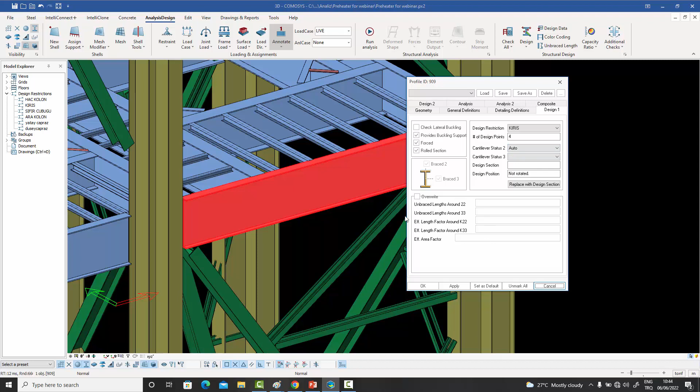This is the number of design points for each segment. So every element will be divided into segments. So even this beam, for example, it's a physical beam going from here to here, but it has lots of things connecting into it. So it's composed of many sections. And so we have section 1 over here, 2, 3, 4, 5. So what that number is telling the program is that each section will be further divided into 4 points, 4 design stations to do your design checks. There's something about a cantilever deflection check, which I'll talk about, and there's the ability to override your buckling lengths as well. So let me just close that and we can continue with explaining the design parameters.

So now let's start with the buckling length calculations of elements, as that is really a very problematic area in most programs. If you actually input your structure according to the detailing requirements, then the programs really mess up when they have to calculate the buckling lengths. So what I've done is over here, I've divided this physical beam into 3 parts because I want splices over here in the detailed model. But as far as the main direction, the entire length of the beam should be used for buckling in the strong direction, and in the weak direction, obviously these ones will restrain the beam from buckling. So I want them to be considered as well.

So if you go to the analysis and design menu, we have something called the unbraced length. And this can be checked for both the 2 direction and the 3 direction, 2 being this axis and 3 being that axis. So if I were to press the unbraced length button and then hover over this beam, I'm expecting the entire length of the beam to be shown as unbraced. And for this side, I want these elements to restrain it. So let me press this button and go over this beam. And as you can see, despite the fact that I've broken it, it's still showing the entire length of the beam as my unbraced length in the stronger direction.

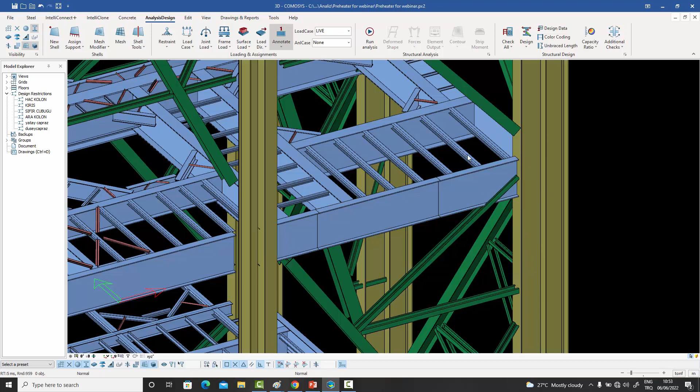And this larger green portion has basically skipped over the element which was coming perpendicular to it, which would normally have supported it, but since we've turned it off, it's no longer supported. Now, another thing I can do is, instead of doing this, I can leave this on. I can say it provides buckling support, but I go in and give it an axial release.

Now, in this case, if this element has an axial release, whether on the start or at the end, it doesn't really matter. It's not going to provide buckling support in the weak direction. So although I have that feature on in the design tab, that it does provide buckling support, my analysis constraints are different. And now, if I go to my unbraced length command and go over this, for the stronger direction, we have the whole thing. And for the weak direction, once again, we see that the element has been omitted.

Now let's talk about a column, for example. So let's select this column, and this column is going across 2 stories, but it's also extending into this third story a bit. But at the point where it is ending, there is nothing to restrain it. It's just continuing to connect with the column over here.

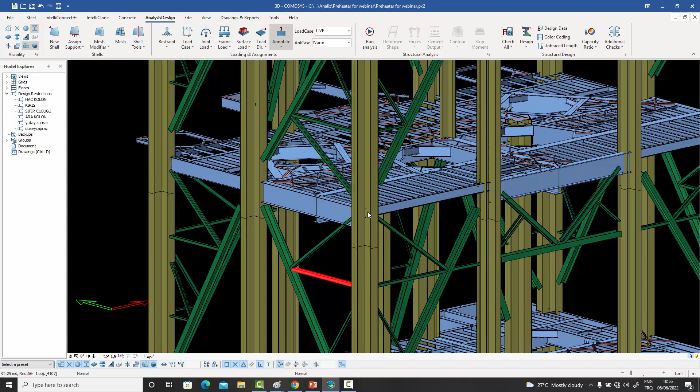So if the program was to do, if there were any design sections over here in this region, the buckling length which needs to be taken for those is not just this little stub which is coming out, but it should be the entire segment all the way to this point until you get to these lateral supports for the other column. So if I were doing any design checks over here, my segment length should be this whole length all the way to these restraining elements.

Now if I go to my unbraced length command and select this column, you can see that in the bottom area which I just showed, the entire area has been painted red. That will be the segment length taken, although the column actually stops short of that. So this feature is extremely powerful, and what it allows you to do is to focus on your detailing as well. You can check your splice locations.

You can model your columns and your beams according to the actual splices where you want them, and you can rest assured that you won't need to override the K factors and the buckling lengths, because they're really time consuming. And every time you run the analysis and the section changes, if you have to go back and modify those factors, then that's really a big problem.

In Comosys, the buckling lengths and the unbraced lengths are calculated very accurately, even if the element is composed of several parts, even if it falls into a segment where the element after that needs to be considered, as you just saw on the screen. And this is a really time-saving feature. And the same intelligence is available to you for the deflection checks as well. So it's not just the buckling checks.

For example, if Comosys checks for the deflection of this element, it will know that even though I'm checking along the stations for this little stub, it needs to take the entire length into consideration. So let's say the deflection limits are L over 500. Then which L do we use when designing this element?

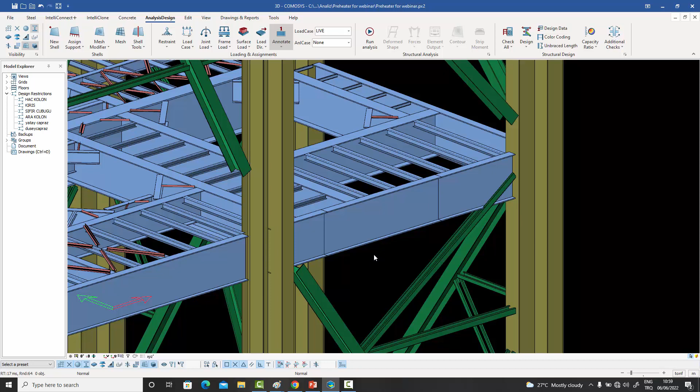Do we take this L, or this and this put together, or all the way? The same intelligence we just saw for buckling lengths is also available for the deflection check. You do have the option of going to the design tab and overriding the automatically found unbraced lengths around the 2 direction for each segment.

If you want to override, you could enter several numbers. For example, for the first segment the unbraced length is 3 meters, for the second segment it's 4.5 meters, and for the third segment and onwards it's 5.5 meters. You can override in case you want something different, but in most cases you will not need to override, and that's a huge advantage.

You can do the same for the effective length factors K22 and K33. But if your releases have been entered correctly and your buckling lengths are correct, then your K22 and K33 factors will also be calculated correctly. Still, you have the option of overriding the result.

Now I want to talk about a concept I feel is extremely important for the design process: design restrictions. In most programs, when you want something designed, you typically say use sections from a particular family, for example IPE, and the program goes through all members of that family to find one solution in the design loop.

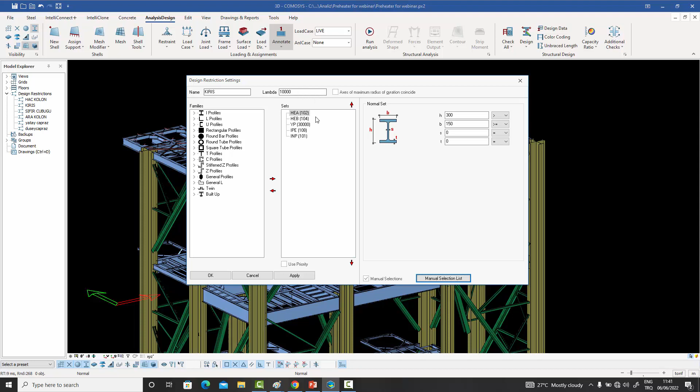For vertical bracing, you can create a design restriction—let's create another one and call it VB. You can say that when designing the vertical bracing, try single angles first, then try twin profiles as well. So you go to the twin section and say try back-to-back angles after single angles, and if that doesn't work try cross angles, and if that doesn't work try back-to-back channels.

And if that doesn't work, try face-to-face channels. And if that doesn't work, I want you to come back and do an HEA section for the vertical bracing.

So you can have a complicated design restriction set up like this, and for each one you can have limitations on the HBST values. For cross angles, you can say put a distance of 12 millimeters between them. For back-to-back ones, you can have the same distance depending on your detailing requirements, etc. So you can have very complicated scenarios, and you can also have this feature called use priority.

What that means is it will first go through the angles, then try the back-to-back angles, then the cross angles, and so on. But if you remove this flag, what it will do is put all these families - the angles, back-to-back angles, cross angles, and I profiles - into one bag, and sort them according to their weights, linear weights, weight per unit length.

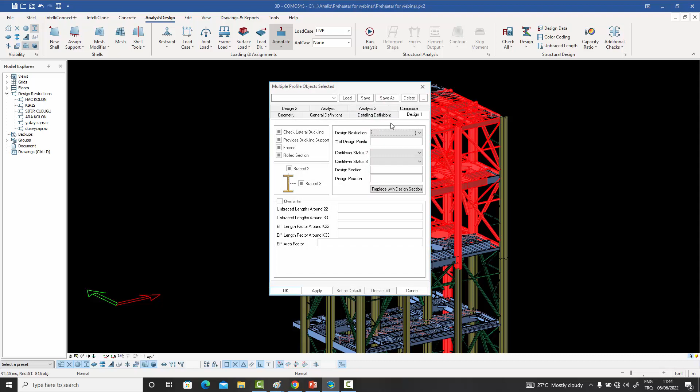And you can do that with multiple selection as well. For example, you can select all the beams over there, or let me just turn on the on-the-fly filtering - go to profiles, filter according to beam groups, and only select the beams. Then you can say I want these beams to be designed according to this design restriction.

This is a very powerful feature which will really clean up or make your design process very efficient. Now, once we are done with the analysis, we can proceed with the design.

We have these options of either checking elements or designing elements - these are two different options. You can check a particular element, which would be check selected, or check all, or check a particular subset, or design the selected elements, or design the entire structure.

Let me explain the difference between checking and designing. What checking will do is take the existing section - so if this is the existing profile with a certain size - check just means use the existing section and do all the design checks at all the stations.

Right now, if I were to select this element, the analysis has been done, but if I say show me the design data, it's empty - the element has no design information, it's just been analyzed. But if I select it and say check selected,

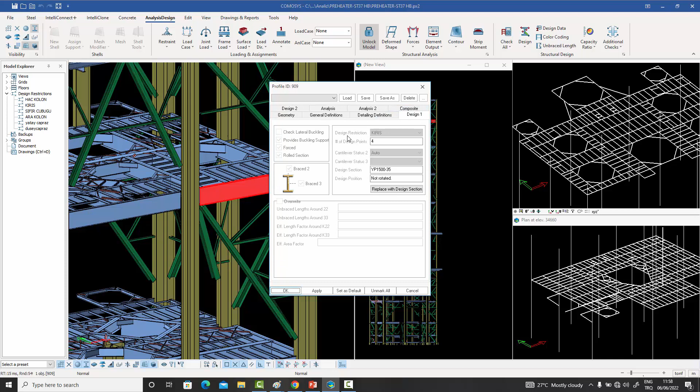How will it find this section? It will use the design restrictions which we had provided. For example, this particular beam might have some design restrictions. Let's go to the design tab. So it has a design restriction, and it has a name over there. This particular design restriction is over here. We can go in there and this says check for HEA, check for HEB, YP, IPE, and this and that.

So instead of saying just check all, if you check the selected one and say design the selected one, it will go through this design restriction and find the appropriate section for you. Let me just do that, let me double click on that. Right now we just did a check, but if we were to select this and say actually design the selected one, it will suggest a section for you. It will tell you that if you use this section, it will give you the optimum result, and then you can modify the existing section according to that, and there are very quick ways of doing that and replacing it for the whole building, etc.

We will obviously talk about those as well in a minute. Now, instead of checking a particular element, let's just go to this check option over here and say check all. This will tell the program to check all the members of the entire building. So let's just press that. Very quickly, it goes through the design of all the elements, all the stations, and all the load combos, and in a few seconds, it's completed.

Once the check has been performed, we can turn on the color coding from here. Immediately on the screen, you can see that the elements have been color coded according to their design ratios. You can set those colors up in your settings by going over here and defining them.

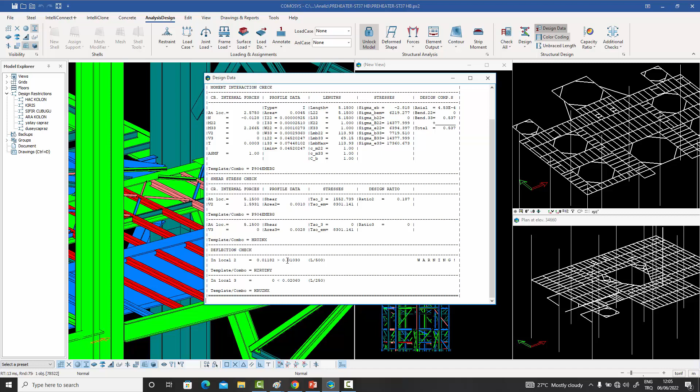That's okay, the shear check is fine, but there's a warning over here for the deflection check. It's not really passing by a big amount, 0.011 is slightly bigger than 0.010. So maybe you can ignore that, depending on what you want to do.

Once again, you can go to other parts of the building. There's another one failing over here. You can go and check the design data. Everything seems to be okay as far as stresses are concerned, but once again, there's a deflection failure.

It's like almost double what it should be. 0.04 is greater than 0.02, so you need to do something about this. So this is a very nice and convenient way to check your design results.

If I was to say that I'm not really worried about deflections right now, just show me any stress failures for the moment, what I would need to do is go to my settings, go to my design ratio colors, and say don't show me the color coding according to deflection criteria. And the moment I do that, these elements also turn green, and now only the stress checks and the shear checks are being done.

Now let's talk about one-click design. One-click design is a very nice feature we have in Comosys. And to explain that, let's recall that design is basically an iterative procedure. What I mean is that you need to load your model, obviously. You need to put the loads in, you need to create the load combinations and this and that. But then you need to run the model, and then you need to check the model, whether some elements are failing or not.

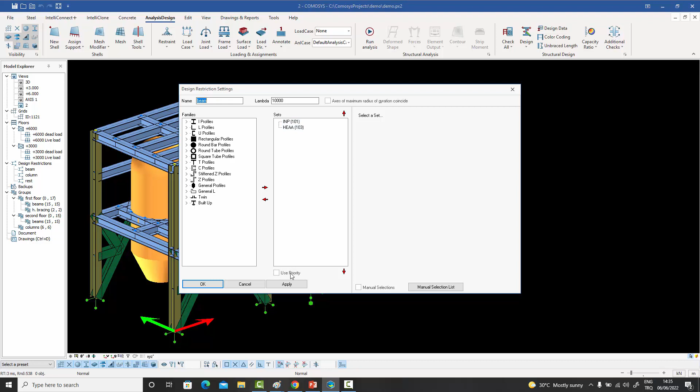And I've told it that for the beams, your design restriction is you can try the INP section, you can try the HEAA section. So I've got my design restrictions assigned to the elements, beams for the beams, columns for the columns, and for the horizontal bracings and vertical bracing, I've assigned the 3rd one. And now I want to do one-click design.

What it will do is run the analysis, see whichever elements are failing or over-designed or under-designed. The ratios need to be as close to 1 as possible. And then it will automatically change all those sections which need to be changed, run the analysis again, change the sections again, and keep doing that until it converges to a final solution without you having to do anything. All you'll be doing is watching these things happen on the screen.

So let me go in there and say one-click design. It asks what is the maximum number of design cycles you want. I can give a large number, but 10 is okay. Basically, I want it to stop after 10 cycles. It could stop after 3 or 4 cycles, but I don't want it to go beyond 10 cycles. So I say okay, and now please keep your eye on the screen and see that these elements will start changing with every design cycle.

I'm going to say okay, and it says the project is going to be saved. I want to do yes. So you see the profiles are changing now on the screen, and it keeps going through these design cycles. It's finished now. By the way, it's done I think 9 or 10 cycles. It says at the end of the first cycle, 62 profiles were modified of this lot.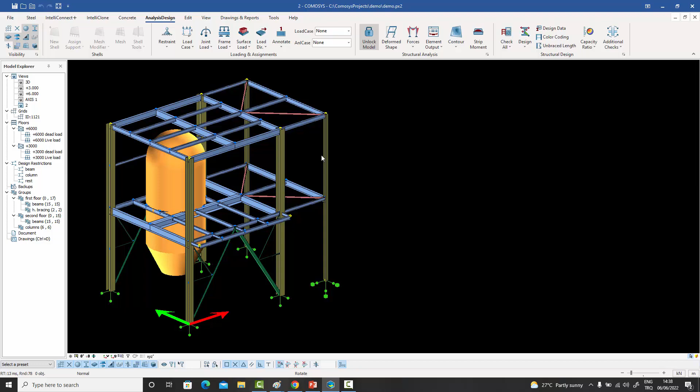Then you can further refine them, of course, and you might need to do that depending on the particular geometry which you have. You might need to force some elements to be similar to others. But this procedure basically allows you to very quickly go through the design process through a one-click design button.

One very nice and I would say unique feature which we have in Comosys is something we call the design evaluator. Now in design, normally because of all this color coding, you can get a design in which everything is green. So you turn on the color coding and everything looks green and blue and yellow and there's nothing red. And it would seem that you've got a very nice design.

But the reality is that you can get all your colors to be green, and there could be many reasons why the design would not be considered a good design by an experienced designer. Now, when somebody brings me this model after having worked on it for a month and wants my opinion, if I turn on the color coding, I really can't guide them much in 10 minutes. Obviously, if something strikes me as very abnormal in the first minute, then I can.

But actually going through every single floor and the way they have set up their horizontal bracing systems and their vertical bracing systems, and things that an experienced engineer would have done differently, would require me to actually sit down and work on this model for a day or half a day, and then come up with my suggestions. So we have developed something called the design evaluator for that.

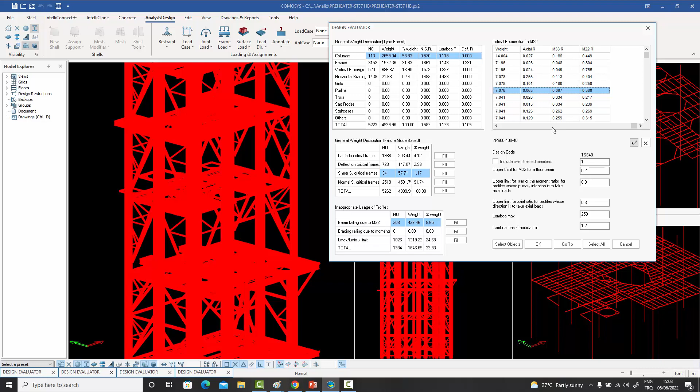Let's press the fill button and go to this one over here and see that, okay, this one has an M22 ratio of 0.449. That's very high. I don't want this one to dominate. So what I'll do is I'll select this one and say go to, and it takes me to that beam. And if I open up the design data, I see that yes, actually the bending 2-2 component is dominant. And that's not something I would have liked. So I can then take a look at it more carefully.

And it's probably because of these horizontal bracings over there, and they're really pushing into it in a lateral direction. So maybe that will give me an idea about what I can do with that, or what I can suggest, because this is a waste of material. This is not a good way of using this. Because the loads are in the M22 direction, the program has optimized this section by just using a bigger and bigger section. But that's not good. I could have chosen a much smaller section had my lateral loads not been there, or if I had used a different type of section, maybe.

Another thing which I don't want is for my bracings, say my vertical bracings or my horizontal bracings, to be failing or having a significant component of moments in their design. I want them to be primarily working for the axial loads. But sometimes when we have these large bracings, even their self-weight can cause bending moments. And sometimes if they're not supported along their length, that bending moment can take up a lot of their capacity. Now, in this case, we don't have any of those, but there's a limit over here.

I think it's, let's see, for axial loads. So it's 0.3. You can change these numbers over here. So yeah, this is the one, I'm sorry: upper limit for sum of the moment ratios for profiles whose primary intention is to take axial loads. So I can reduce this number to 0.2, for example, and I can see which ones are failing according to that.

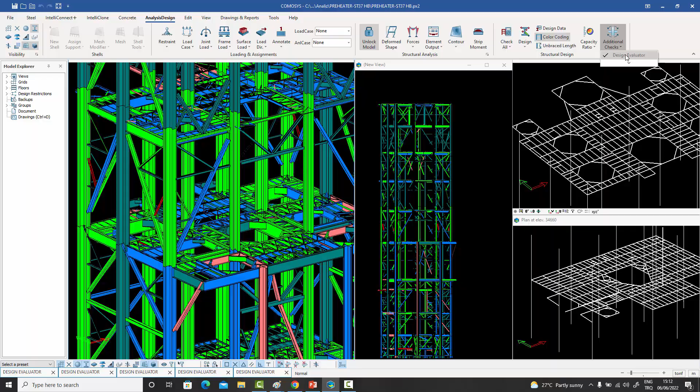So this design evaluator is a very nice feature which you can use to quickly go through as a senior engineer in the company, because when your junior engineers are forwarding you their models, you can go through them in 15 minutes, 20 minutes, half an hour, and give them a lot of nice comments which they can use in their refinement of the analysis.

Now, I had touched upon this in the steel webinar a bit, but I want to just do a small recap of that. And that is that while we can work in the locked model as well, as far as the design of connections is concerned, we can also work with the unlocked model. And to do that, we need to do a few things before we unlock the model.

What I mean is that we need to tell Comosys to go through all the load combinations and find the maximum forces in the beams, the horizontal braces, the vertical braces, the trusses, the purlins, etc., and actually assign those maxima as a ratio of their capacity. So if it's a vertical brace, for instance, it'll be a ratio of its axial capacity. If it's a beam, it will be a ratio of its shear capacity. If it's a truss element, it will be a ratio of its axial capacity once again.

And then there are those elements which we design according to the full capacity anyways, things like moment connections, but we're not talking about those right now. For other elements like floor beams, trusses, horizontal braces and vertical braces, etc., we basically convert the equivalent forces of all the load combinations into one, what we call the capacity ratio.

So if I were to, for example, zoom into any one of these beams and double click on one of them, you can see over here that the shear capacity ratio right now is 0, as is the axial capacity ratio. What this is basically telling you is that right now Comosys has not converted the results from the analysis into equivalent ratios. Right now there is 0.

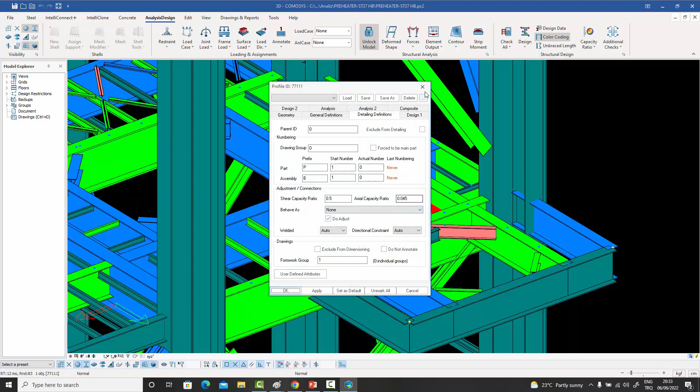Now, if I were to zoom out a bit, I don't necessarily have to work one element at a time. I can select a whole bunch of elements and say assign the capacity ratio, and it will go through all the elements which I have chosen and all the load combinations which exist in the model, and then assign. So it says computed capacity ratios for each element is set. If I double click, this one has been set to be 0.5. The axial capacity ratio is very low. If I double click on this one, it is set as 0.7. If I go into, say, a vertical bracing, you can see it's 0.859, pretty high. That's why with the high numbers it keeps the exact number in the vertical bracings. In this one, it's 0.5.

So what it's basically done is it's gone through all the load combinations, and wherever axial load is required, so that would be your vertical bracings and horizontal bracings and your trusses, etc., it has converted them into an axial capacity ratio. And wherever shear forces are dominant, like floor beams, those it converts into a shear capacity ratio. And as far as the moment connections are concerned, they're always designed according to the full moment capacity, so we just do it with a ratio of 1.

Now, as a general rule, these connections always should be over-designed a bit. You don't want your steel structure failing from the connections. If anything, it should be a ductile failure, and the element should yield, or at least show excessive deformation before anything happens to the connection. So if your forces are 0.3, you should design it for 0.5 or even more. So it's a good idea to have at least a minimum of 0.5, and then if it's more than that, that can be accommodated.

But sometimes we have the same section, and the same section could have different capacity ratios assigned to it because of the loading, but you don't want the connections to turn out differently. So let's say this one has a capacity ratio of 0.7, this one 0.6, this one 0.5, this one 0.4, and then 1.2, but they're all the same section. What you want is for all the same sections to be assigned the capacity ratio of the one which carries the maximum load, because then you will have very consistent connections everywhere, rather than this one getting 6 bolts, this one 4 bolts and this one 2 bolts. You will have the same connection everywhere for, say, the IPE 160 connection.

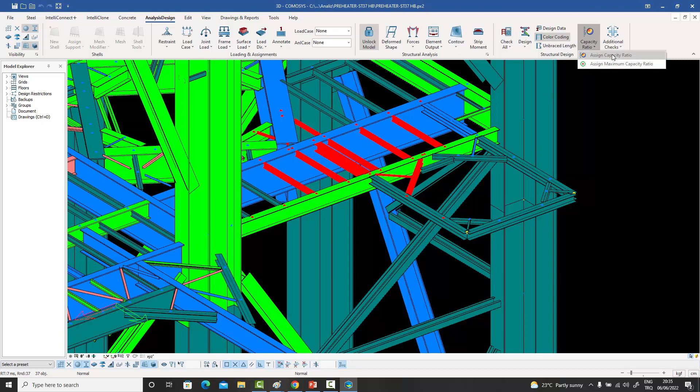For that, you can select the elements, go to your capacity ratio and say assign the maximum capacity ratios. It will group the selected elements according to their sections, and then find the one which has the maximum capacity ratio which has just been assigned. So you need to use this command first and then use this one. When you do that, it will group them together, find the one with the maximum and assign that maximum to the others. So this is a very useful command, and it will lead to a very uniform set of connections throughout your building.

One type of nonlinear analysis which is very common in structural engineering is the analysis of soils as compression-only springs. Now, foundations have soil beneath them, and the structure can be subjected to lateral loads.

Under these lateral loads, we might have an overturning of the foundation. But analyzing for this overturning requires that the soil be modeled as compression-only springs, something which is not able to take any tension. So if we look at the load case of earthquake Y, for example, a lot of this area is under tension. There is no stress under the soil because of these loads.

Similar would be the case for wind in the X direction, or if we were to take some other wind in the Y direction, it would be something like this. So you need this, and these are load cases. In the combos, the situation is slightly better because you have the vertical loads as well.

What you do in Comosys is, if I were to double click on this supershell, you can go to the settings tab, and here you can see that below the supershell we can give soil springs. These springs can be different in the X and Y directions and different in the Z direction. So over here, for example, we have defined two springs, soil KH and soil KV. KH are the ones which we use in the X and Y directions to basically keep the foundation stable in the XY movements. But the KV one is the one which is nonlinear, the vertical component.

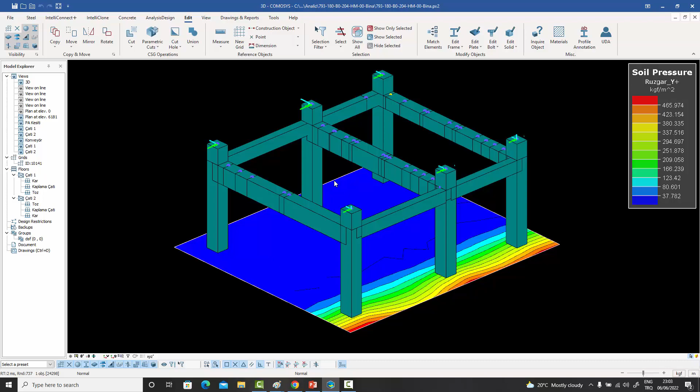It's a very useful feature which is usually not available in many programs, or they try to keep it separate. But in Comosys, we've provided this ability to analyze soil as compression-only springs within the program, and that's going to be very beneficial for you.

Now let's move on to this example over here. This is a little, very simple truss. We have loaded it with about 1800 kilonewtons in the middle.

The only novel thing about it is that instead of doing a normal classical linear analysis, what we want to do is a nonlinear analysis in which the material is bilinear. So the material has a stiffness up to a certain point, and then it softens up and goes sideways. And obviously, when it crosses that limit, that yield point, if you will, then the deflections will start to grow rapidly because it will be a much softer material.

What we've done for that is we've assigned to it a material called steel bilinear, and you can define these materials in Comosys separately. So it's over here, and you can define their yield strains and hardening factors, etc. And once you do that, you can define it to be a uniaxial material with the type bilinear, and assign that to truss members, for example.

Once you have that, then you can run the analysis and find out the results. In this case, what I've done is, if I go to this create/edit analysis cases, I've created a nonlinear static case, and I've told it to divide it into 10 steps. So the load of 1800 kilonewtons will be applied in 10 intermediate steps according to these settings.

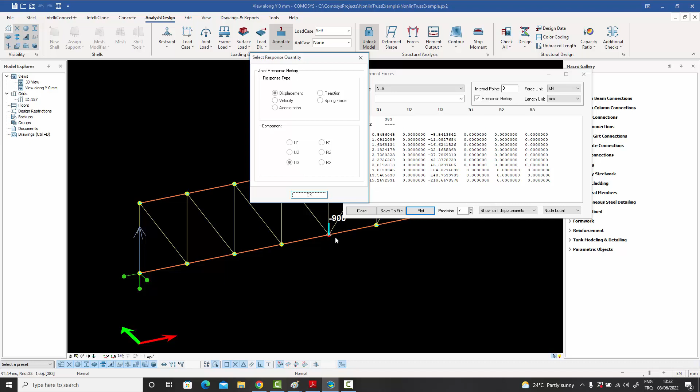If I plot that curve and say I want to plot the displacements of the selected node, the U3 displacement, which is the vertical one, you can see on the screen that it went linearly all the way to about half the load, about 900 kilonewtons. It went linearly, but then it started softening, and the softening kept on increasing.

At the full load, had we done a normal linear analysis, the deflection would have been something like maybe 50 millimeters, about 5 centimeters. But with the full nonlinear analysis, we see that the truss actually goes all the way to about 20 centimeters because it really softens up after that.

One final example before we wrap this up, and this is a preheater tower, as some of you would know who are in the cement industry. These preheater towers are very common, and they're very complicated structures, considering the equipment running through them is highly complicated, with a lot of different loading conditions.

Now let's say we don't want to do a response spectrum analysis, but we wanted to do a time history analysis on this. Obviously I personally prefer to do the response spectrum analysis in most cases because they are much easier to deal with, and they create much less clutter. One response spectrum can actually

cover dozens of time history analyses, because if you select a particular time history, you need to be very careful because it might not represent the full spectrum of that area. Theoretically you would need to consider maybe 20-30 different time histories and ensure they are equivalent to the response spectrum of your area and site. That's a very hard task, and also doing a full time history analysis itself is quite challenging in many ways.

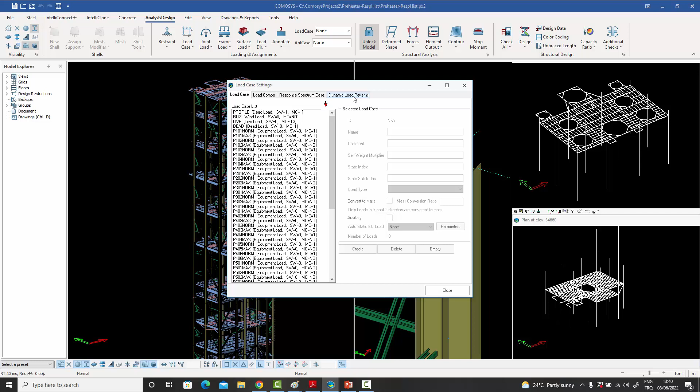That next step is you go to your menu once again, and you go to create, edit, load cases and combinations. On the right hand side, you have dynamic load patterns. If you select that, you have the option to create a dynamic load pattern again. To this load pattern, you can assign any time series. So we just created this time series of El Centro, and you can create more than one.

You give it a name, and then you assign a particular time series to it, and say you want to assign this time series in the X direction, so let's say this earthquake is in the X direction. For the time series, you can be given some units and a scale factor, and this will constitute a ground motion excitation. You also have the option of time varying loads, so you can apply particular loads to particular joints if you want as well, but here we're going to do a ground motion excitation.

Once you're done with that, you go to create and edit analysis cases, where you create this analysis case, and inside you can then select the dynamic load pattern which you just created. If you want, you could have created more than one and these will be combined, and you need to tell it what integration method it will use.

So you have the option of Newmark integration or Wilson integration, and you can also change the number of steps. The time series has a certain number of steps, but you can go beyond that. For example, the earthquake lasted about 30 seconds, but you might want to do the analysis for 40 seconds. So you can have a different number of time steps, and even a different time interval, to make the process simpler.

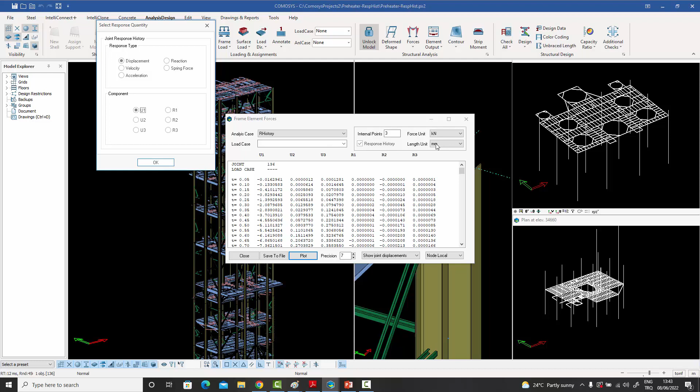What I can do is plot to a file. Since I did it in the X direction, I'm going to choose U1, to see the displacement of this top column joint. I say the units are millimeters, and OK. When I do that, I can see that the excitation of the El Centro earthquake has created a maximum response of about 150 millimeters at the top. Then it started to come down, and this is where the earthquake ended, around 30 seconds. After that, it's free vibration basically until the damping brings it down to zero. So at the top level, we have this deflection of about 150 millimeters in the plus direction.

If I go down to this floor and turn on my joints, let's see if I can zoom in and select this joint. This is pretty close to the ground this time, the other one was at the top. I go back to my joint element output, select my history, turn it on, and plot. This time we will see it's more violent shaking actually, because over here it's much stiffer near the base, and the higher frequencies, the smaller periods, play more of a role, but the overall amount of displacement is much smaller than the top floor, because this is very close to the ground floor.

You can see that it's been shaken more violently as far as the frequencies are concerned, but the total deflection is a lot lesser. So you can do analyses like these and satisfy your curiosity about how the structure is going to behave, and Comosys will help you do those kinds of things as well.